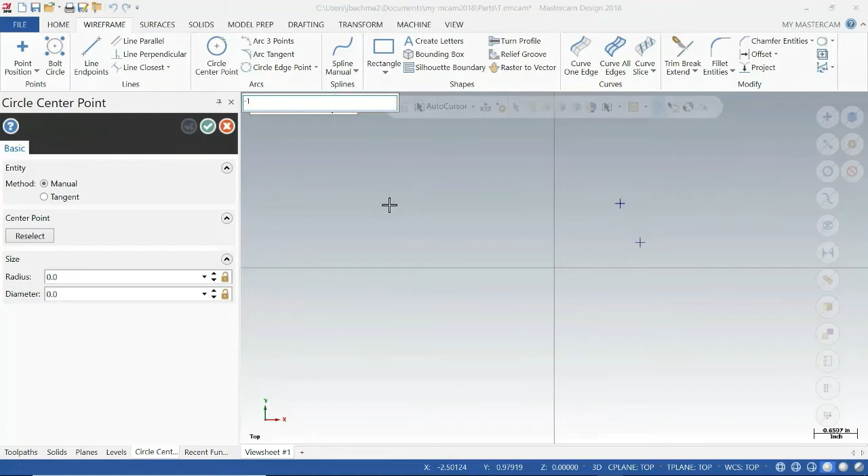Then we'll hit check to create those. Same thing with a circle - it says enter the center point, so here I could hit -1 on the keyboard, 1, which puts in the point. Then I hit enter, and I can control the diameter, or say I just want a 1-inch diameter, hit enter, and then hit check.

So now I've got my circle in space. You can see how you can use that to make some simple geometry that you can cut. You'll see that it gets this kind of crosshatched look.

If you want to change how things look, you can right click on them, or go back up to the home tab, since they have similar commands. You can change the color of some of these if you want, to highlight - some red, some blue. You can also select by colors, probably this icon that looks like colors, so now I could select everything that's red, for example.

So that's wireframe. We also have surfaces, so you can make a surface using a lot of these common methods. One I do use sometimes is fill holes, or basically fill in between two surfaces. Sometimes I'll have a hole in something, but I'm not going to drill it right away when machining - I'm going to first go over the top of the hole to machine it down, so I might fill in the hole with a surface there.

And the last one is solids. Typically I'm going to make all my solids in some sort of CAD software instead of the CAM software, but you can come in here and try to create a cylinder or a block if you want - I just don't typically do that.

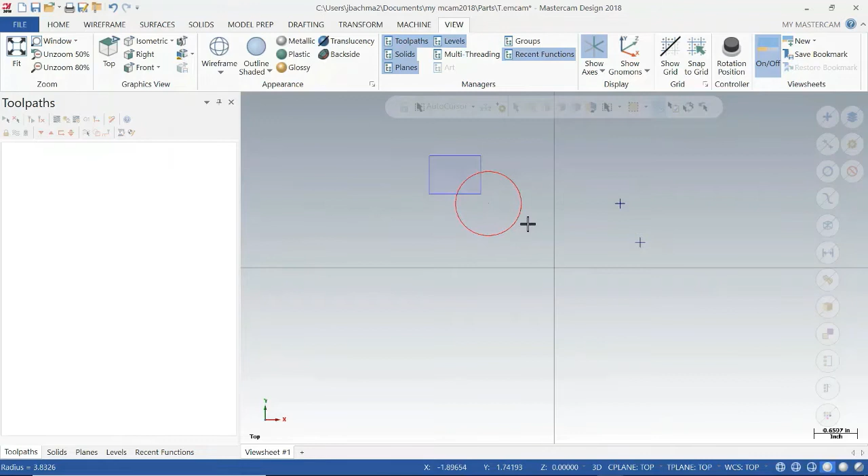So yeah, that's kind of an intro into this interface here. So there's a... first let me delete this, sorry. I'm going to select those, delete those.

Okay, so now let's start talking about the work process for working in Mastercam. First thing we're going to want to do is bring in our solid, the shape that we want to eventually turn our workpiece into to make our part. Then we're going to have to tell it what stock we're going to start with.

You should keep this in mind: you need to think about how you're going to machine or manufacture something the entire time you're designing it. This shouldn't be the first time you're thinking about how you're going to manufacture it, otherwise it's going to be impossible or not very efficient to do. You should be thinking about how you're going to hold down the stock while you're processing it. There's a lot of tricks and things you want to think about before you get up to this point, but hopefully after watching this, you'll have a better feel for what some of those things are.

Okay, so I made a couple of example solids. You can pull in SolidWorks files, or typically what I'll use are parasolids. If you have Mastercam 2020, that'll pull in SolidWorks files from 2019, 2020 easily. I actually have Mastercam 2018 still on this computer, and I have SolidWorks 2019, 2020.

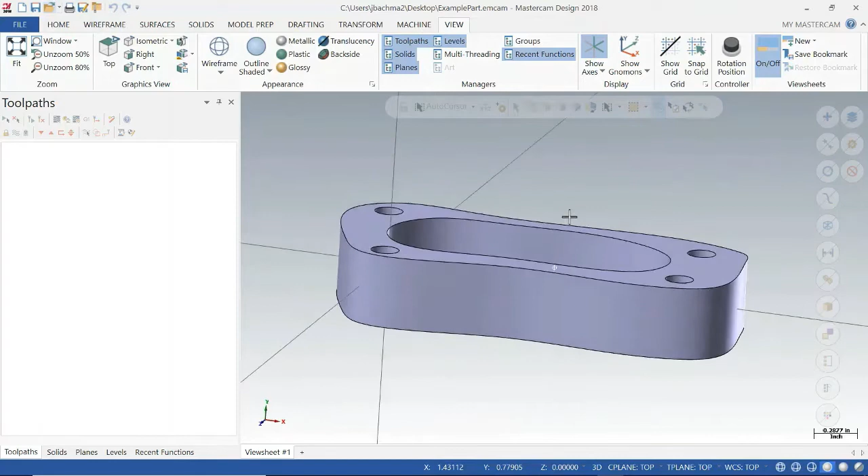You can see it's not really necessarily where I want it in space - it's going to be hard to set my zero point here. You can also see that it's not oriented the way I want. This will be the top portion in SolidWorks, so it'll actually usually pull out the front in the Z direction. So if you want your part to come out oriented right to begin with, have the side you want to come from machining facing the Z direction. So first things first, I need to move this around in space - that's where I'm going to go to this transform.

So if you have square things, a lot will be like move to origin, or for example, maybe I had a big hole here and I'm going to indicate off of that to get my origin. So what you might do in that case is select move to origin, then select that hole, and it'll move that right to the origin.

So that might be one way that you'll do it, but I'm not going to indicate on this hole. Actually, I'm going to indicate on my stock. You want to be careful a little bit when you say move to origin, because sometimes if you sit for too long, you can accidentally select some of these outer edges and not the actual center point.

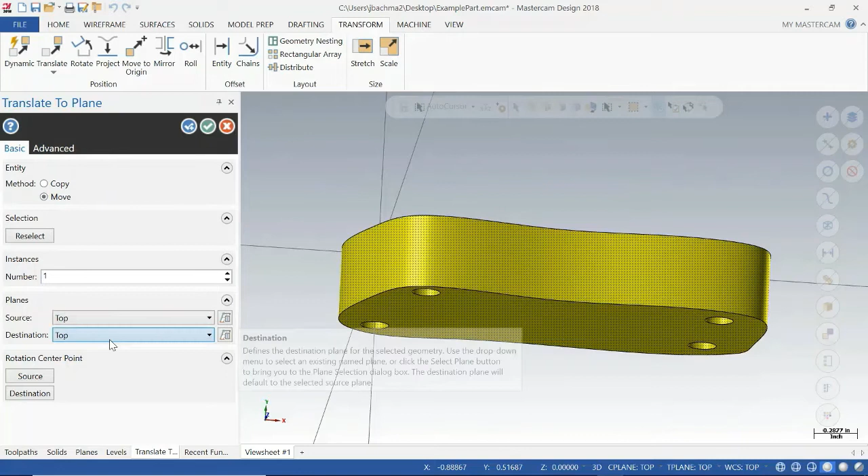Okay, so now I could rotate this down in the Z direction, but I actually just usually use the translate to plane. It says select the entities, so I want this solid, hit the end selection up top. I don't want to copy it, I want to move it. And I'm going to take this top plane and make that my front plane, so that way it's going to be facing up.

Let's give me a little preview. So that looks good, right? Still got top, top, top. That looks good.

So now basically I need to translate it in space, and there's kind of some different thoughts on this area. So if I'm going to have my stock here in positive X and positive Y, I'm probably going to touch off my origin here on the front left. That's nice because the edge finder, or if you're going to use the side of a center drill, it's kind of out front, easy to get to.

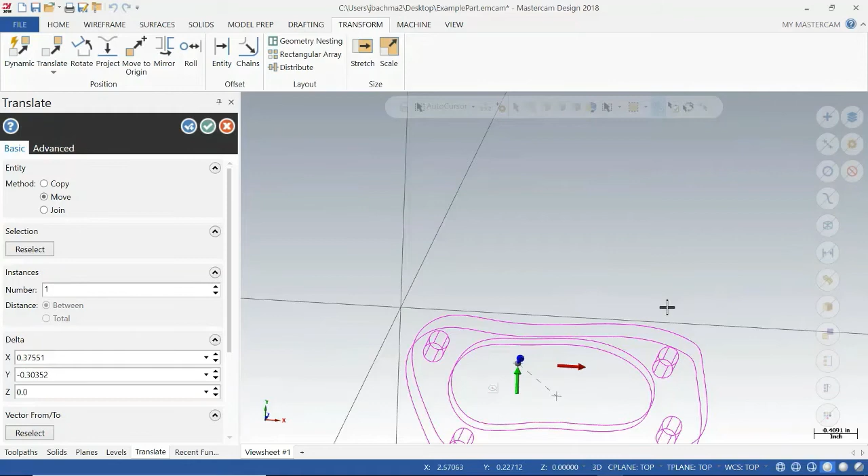You might also want to just go in negative Y and positive X. Let me move it around, maybe that'll make it what I mean a little more obvious. So if I move this, we could move our part here, and then we'd have our stock around it, and we could then touch off to the top left. The nice part about that is that you're against the fixed jaw of the vise, so that's not going to move unless you take it off the table.

A lot of people on our campus will do this front left though, and so it's probably just, if you do that, it'll be easier for people to check your work.

I can see my Z height is already correct. If it's not, you'll want to move it down so it's right even with the top. So I'm going to make it not even with the top like this. It's not really obvious, so you might not even know how far off it is.

So what I might do is go to home and do analyze. I can select a face, or I'll just select this edge, to see okay, where is this at. And it tells me this Z is at 0.05 at this point. So okay, I know it's at 0.05, so I've got to move it down.

So I'm going to come down to the transform. I'm going to click on this whole solid, and I'm going to go negative 0.05. And then I'm going to click check, right?

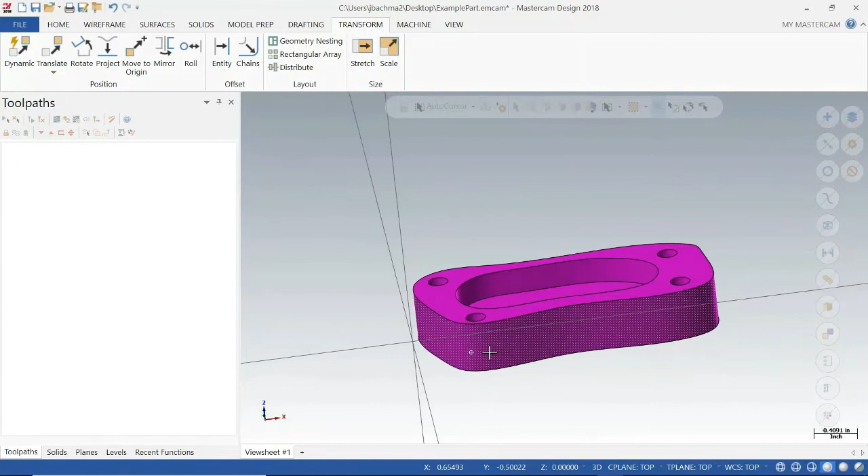So one thing you might do is I want to look at it from the front, so you might right click and then hit front. Then notice that your construction plane and tool plane got messed up. So that's actually going to mess up when you try and generate toolpaths. So you'll notice that now, because my construction plane is the front, I'm now making circles in that plane rather than the top plane. That's kind of the purpose of that plane.

But again, we're going to want to go right click everything on top, right? So the scroll wheel in and out, if I hold shift and grab the scroll wheel, I can move it around. Also left, right, up, down on the keyboard will also move it around in space for you. I usually kind of keep it somewhat isometric.

Okay, so we have our part in a reasonable spot. And I might think, am I going to put a block of material in here and then cut this out in the vise? I mean, probably that's one way I could do it.

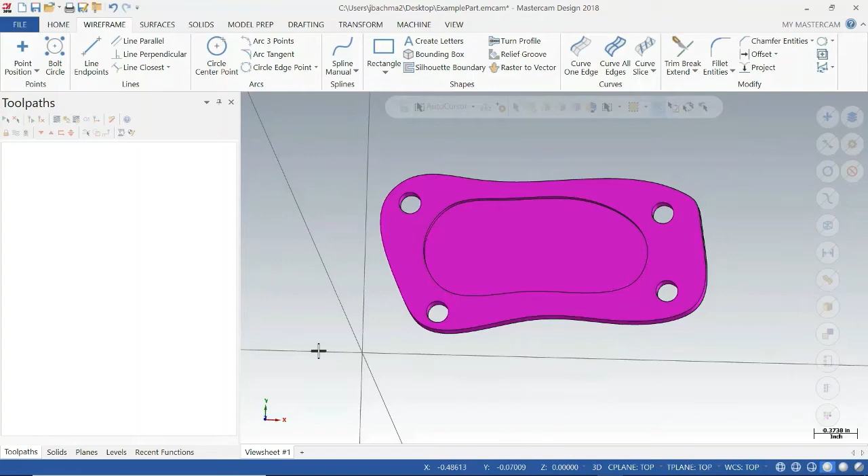I could also use some step blocks and fingers and hold down the piece right on the table with a little piece of material between it, so that I'm not cutting into the table of the mill. So those would both be possible routes to do it.

Keep in mind you wouldn't want this to get real thin over here after you machine it, and this side if it's on the vise, because then it's actually going to kind of squish your end mill as it's going around. So let's say potentially I have some kind of fingers down on the side, but that means I don't want to hit those fingers, so I have to think about giving myself some extra space on my stock so I don't hit it. That also means that piece of material, you might have to square it off in the machine. You could get a much larger piece and put this kind of anywhere and not really care about its orientation too. That's another way to do it.

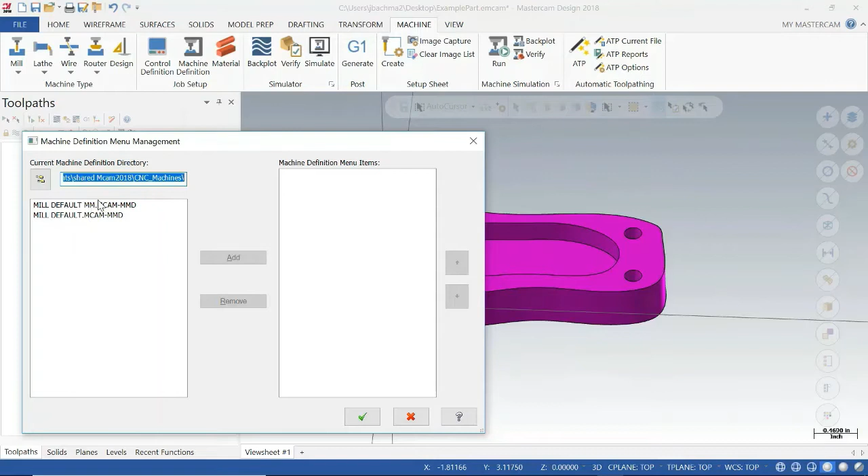Next, we're going to say what type of machine are we going to make this out of. We're going to use a mill, and we're just going to use the default. You can bring in your own type of machine, but typically I won't bring in a specific machine definition. The only thing you might use is millimeters—if you're going to do something in millimeters, you can bring that in and do everything in that system. But instead I'm just going to use the default.

Give it a second, and you'll see it'll pop up over here on the left. Let me just make sure everything's recording while I'm still doing this. Okay, we're looking good.

First thing I'm going to open up is the properties. I'm going to start with the files. Oddly enough, the options button is this exclamation point. If you see this exclamation point, that's going to bring up some more options for you in these different areas. For some reason it looks more like an error message to me—I don't know why that is, but this might even be changed in future versions. Here you can have your different libraries, different defaults. I usually don't mess with this.

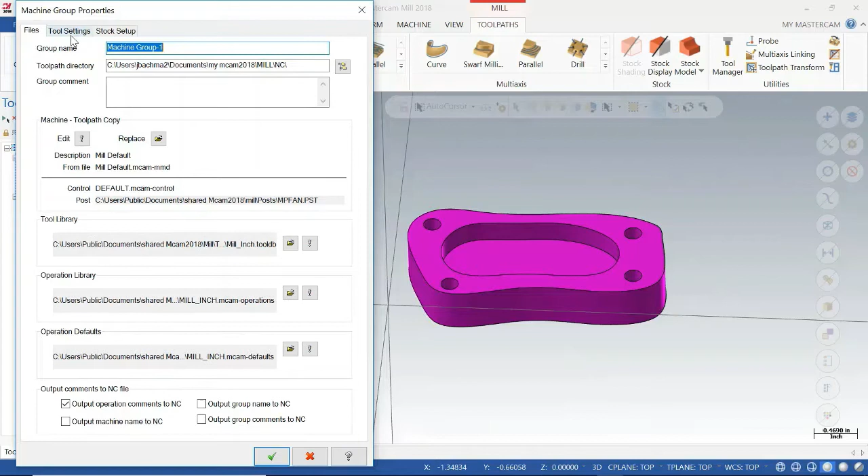Here's the first thing I'm going to start to modify: my tool settings. So first thing I'm going to do is I don't want to pull in the spindle speed and feed calculation, or pull the feed just based on the tool. It should be based on the material, and then this will also use the RPM and the feed per tooth to calculate your feed.

Another thing I'll do is assign tool numbers sequentially, and that's because if you have a big shop with 240 tools, maybe tool number 240 will always be 240. If you have some huge machine, maybe it'd be more like number 15. But for us, we typically have to load in our own tools for each thing we're going to machine, so we're going to assign our own tool numbers and put them in the machine that way.

We're going to start our G code with N100, and we're going to step up by 10. That'll help us search through it if we ever need to find stuff. Then you can select your material here—so let's pretend we're working out of aluminum. You can edit this and select different ones.

So the last step here will be the stock setup. I'm just going to start with a rectangular piece. You can bring in your own solid if you want, and you could even add some of your fixturing to it. But I'm just going to use a rectangular.

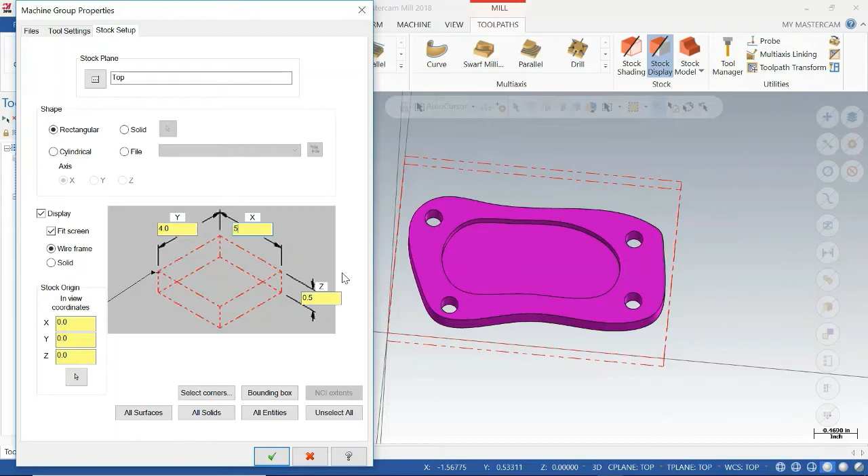So let's go back into the stock setup. I'll click there again. Maybe we want actually 4 by 5, so we'll add a few inches onto each one. I'll click check, and you'll see it's gotten a little bit bigger.

That's probably a little excessive, and we can still transform it. So maybe I'll translate this a little bit more. I'm going to select it to move it, and I'll just use my arrows.

Maybe this is the size of stock I'm going to start with. I'm going to clamp it here and here, here and here, and give myself some room to cut this piece out.

I mean, maybe you just want the pocket on the inside, and then, I don't know, if you already had this piece, but let's say you had a square piece with a pocket, then you would want to position this to an exact point. But for a shape like this, because I want to show you how to cut the outside out, we'll just put it here in space.

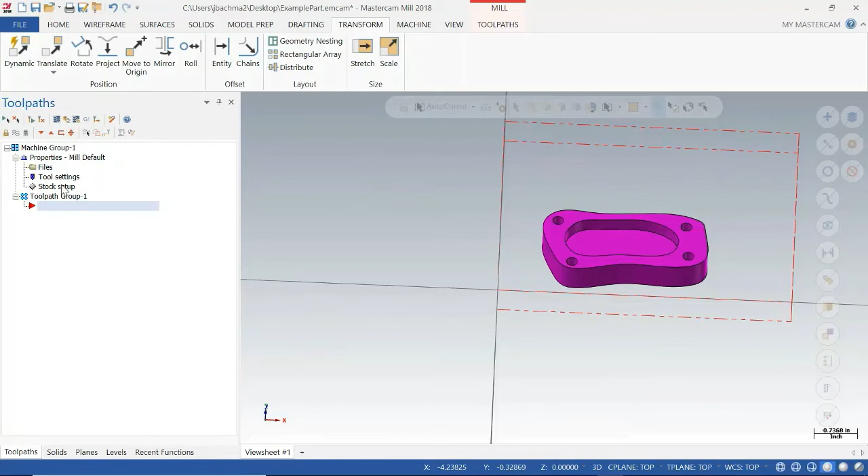So okay, we have our stock set up. I like the top of my stock and the top of my part all to be at 0 in Z, so I can tell when crossing from positive to negative in Z, I'm going to start to cut, and that's when I'm really keeping a close eye on things.

All right, so at this point you'll see that once we selected the mill, we have these additional toolpaths that have come up, and they're split into 2D, 3D, and multi-axis. I'll typically work with 2D and 3D. I'm sure more advanced machinists will use this all the time too, but I don't machine as often as I would like to, so I'm generally in these two areas.

So you can see the different types. Contour, you'll select a contour and you can go on the inside or outside. You can also add extra paths, so if you want to create something like a boss, you can do that. You can program in drilling in different spots.

But let's start with the pocket on ours, right? So we're going to start with the pocket. This is one area where it looks a little bit different in 2020 - they've just updated these symbols, but they're the same group of symbols.

Because we have a solid and don't have any wireframe entities, it won't even be an option here. So we'll click solids and we'll be able to select things in 3D. You can select just one edge here and it'll do a full loop. Here you'll have to tell it which way to go along these different edges. Here it lets you just do a partial loop. You can select faces, the last thing, and this will unselect or select things.

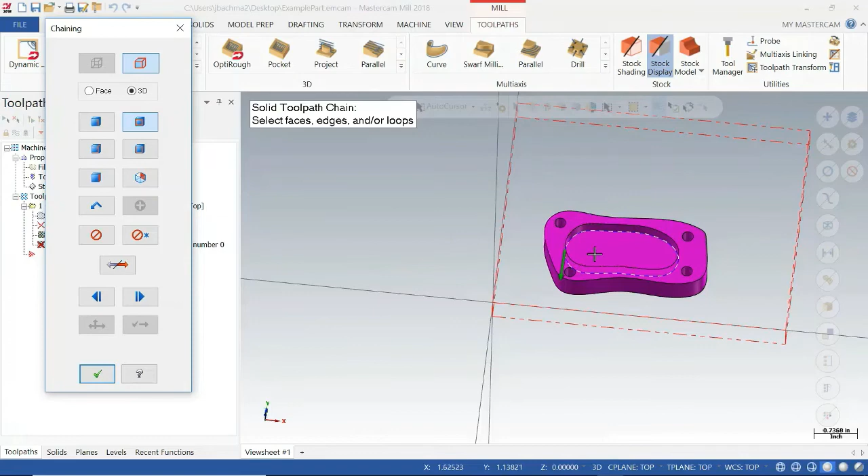The bottom is nice because then it knows what depth I want to go. So usually I'll select down in here. It'll ask me, yep, that's the right face. And I want my tool - here my tool is turning clockwise, so it's going to be conventional milling. I want to switch the directions, and I'm going to want to do climb milling, so it's going to go along the left-hand side. I'll click check, so now it knows my contour.

So if I ever come back in here and want to reselect your geometry, you can click on select chain, remove and then reselect. Next we're going to select our tool, so I'm going to come in here to select library tool. You'll see various options, so let's come in - usually what I would do is select none to start.

I'll do my flat end mill, and usually I'll use a filter to get rid of a lot of the sizes. You can see I have these options, so let's try a 1/2 inch. This is tool number 290 in their system. You'll see when I bring it in, it'll come in as tool number 1 for me, and when I call out for a tool offset or diameter offset, this will all be tool 1.

So the material brings in 400 surface feet per minute. That calculates the spindle speed, and you can use that to calculate these. Usually I'll just use rapid retract.

In this case, this is a little bit high, so I'll bump this down to on the order of 10. And my plunge rate's a little bit high too, I'll usually do this on the order of 1 to 2.

Then you have your force tool change. This is nice in that if you do 2 operations with the same tool, when you do the second operation, it'll still program in the tool change, which is nice because it's easy to jump to that spot. So this makes it easier to go in.

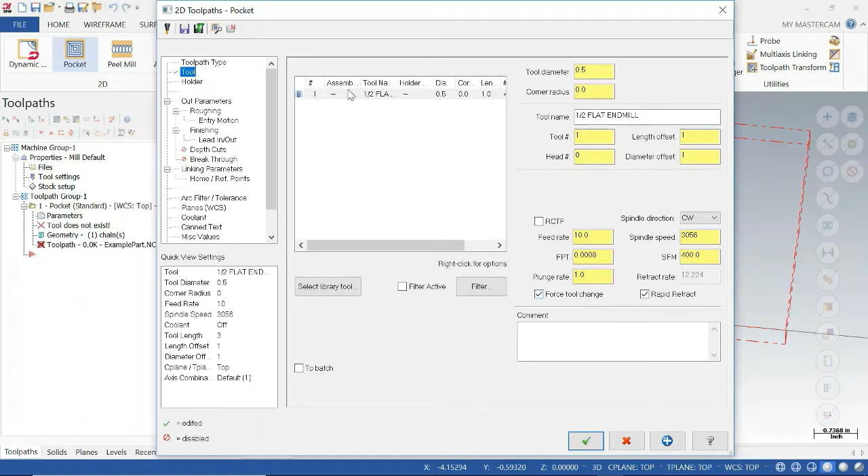So we're going to keep going. We have our cut parameters, and in this case we want to do climb. It kind of depends on how you want to do the tip compensation, so we want to compensate, and then we're going to select nothing on the wall. You'll see those lines will go away.

Next we'll go into roughing. Right now the automatic method is this high speed. I would either use that, or constant overlap spiral is also a common one to use.

Basically what you'll do is you'll step over 50%, which is a 1/4 inch each time. You have this entry motion, which is usually in percentages of your tool diameter. So here, this is just picking the option instead of having to go straight down, it'll helix down in.

So next we'll have finishing. If we want to do a finish pass on the sides of it, maybe a 10,000ths finish pass. Spring pass will basically be right at the surface finish, go over one more time. It'll kind of hope that there's a little deflection on a bigger cut, and that your last pass there won't be any deflection, so it'll cut a little bit. I'll usually keep the tool down so that it's not going up and out all the time.

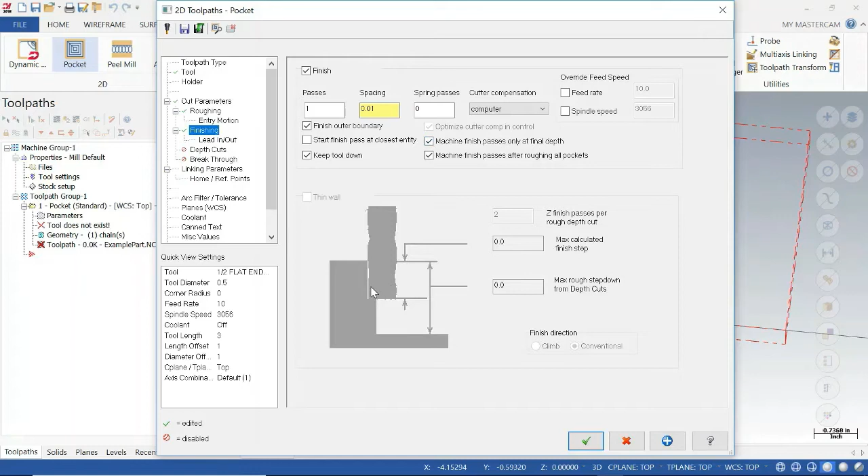If you want to try and clean out the chip more, you might pull it out. I'm only going to do it at the final depth, so I'm not going to do a finish pass halfway up and then at the bottom. I'm just going to do one finish pass out here.

So lead ins and lead out. You have this entry, which will come in tangent, and then you'll have this length. So this will come in a 1/2 inch this way, and then it'll come in at 100% of the tool and sweep 90 degrees to turn into here. If you wanted to decrease this to 45, you could come in more at an angle like this and not do the full 90.

You could also do something here, you can bring it over to here. But the typical setup's usually good here.

Next we'll do depth cuts. Maybe we don't want to do the full 1/4 inch depth all in one go, so maybe I want to do it in 100 thousandths and do one finish pass on the bottom of about 10 thou as well. Here again, I'll keep the tool down.

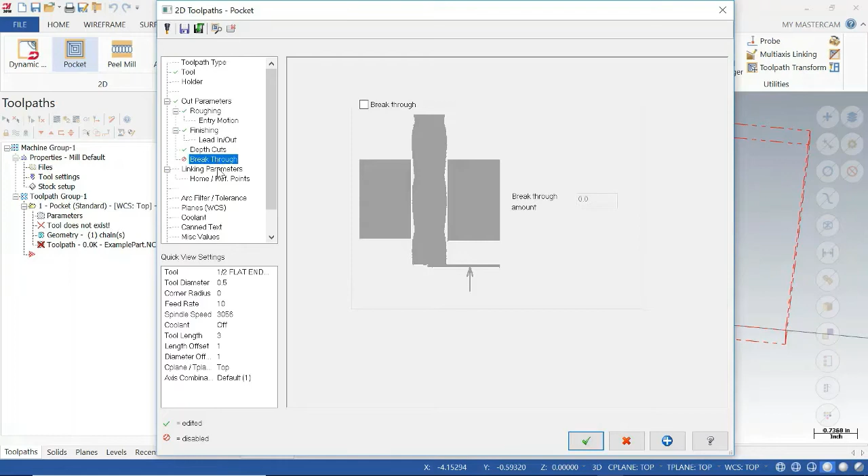So breakthrough, if I want to go all the way through, I do breakthrough. Next, and maybe one of the most important things to pay attention to, is your linking parameter. This one you're basically going to tell it where's the bottom. I can tell it incremental, which says that contour line I picked, I want it to be 0 relative to that increment. I could also do absolute, -0.25. Here, I'm going to want to do 0 for the top of my stock, absolute, because that's where I put it. This would cause a crash basically if I didn't change this. So right now I'm saying that the feed plane right here is only 0.2 from the bottom of the pocket.

So that would put it like right here. So that means it would be rapiding down all the way to here and then feeding. So I like to just make sure I have absolute for all three of these. And then this one kind of depends if I pick something at the top or the bottom of the pocket, then I might do absolute or incremental here.

The last thing you're going to select is the coolant. So we have flood coolant, and we're going to turn that on. And so here you can begin to see kind of a highlight of the things that you picked. You can see some of the feed rates, the spindle speed, coolant, and that sort of thing.

So we're going to click check. And so you can see our current toolpath right here. You can see the blue is the feed at 10 inches per minute, and the yellow are the rapids. So you can see it's going to rapid down just a little bit, do all the cutting, and then it's going to rapid back out.

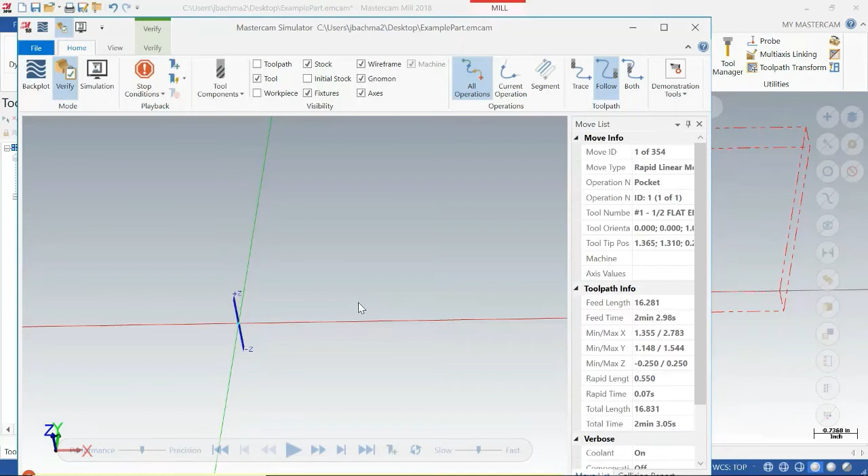All right, so you can see our stock, you can see our tool, you can see the tool position, right? So let's make this full size. So you can see I'm a quarter up. I'm at my retract plane.

And so before I run this, you can look at, we don't have a very long thing to simulate. The whole thing only takes 2 minutes in real time, so I'm going to have it go rather slow. You can modify how slow or fast it goes, and depending on your computer, you can change the performance. For my work computer right now, it's not very good.

Okay, a couple other things we're going to do is we're going to want to make some stop conditions. So we're going to want it to tell us if it's going to crash. I'm going to open up stop conditions. Whenever we change operations, I want it to stop. If I do a tool change, I want it to stop. If there's a collision, I want to stop.

You might have some tool inspection points. I don't have any, but you could select that. So the other thing that I would like to do at this point is, I got to remember where this is now. Options.

Yeah, so options at this point, you can come in here and you can say collision checking, right? So basically, now I want to select what things do I want. So if the tool collides with any of these, any of these or any of these. So any types of collisions, I want it to tell me about. Okay.

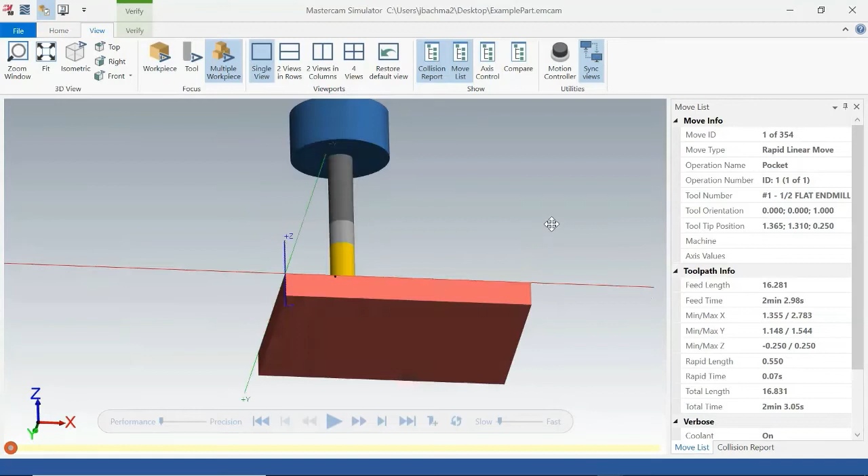I just updated my defaults. Other thing I'll do is come into the collision checking here. This is probably what I meant to select - I want it so that if it hits the shank or if it hits the shoulder, I want it to tell me about it.

Okay, so learn something new every time. If you select this option, this would be your tool just hitting your workpiece and not your stock. So you actually don't want these selected. What you actually want is this verified one, where you're saying that no matter where it hits on your stock material.

It's gonna find those collisions. The other thing I like to do is the color map. What that'll do is if you do multiple operations, you'll see how it comes in handy - you'll be able to see the different operations. So at this point now we're going to hit play.

Kind of see our stepping down. So there's our pocket, and it's smoother than that - it's just my performance is so low that it's doing it that way. You can tell my tool is not that big, so there's not much room for doing a helix down into it.

So if, for example, we wanted to switch out for maybe a 1/4 inch and see what that one looks like. We come to a 1/4 inch, and then we're going to check. I'm going to see now it's dirty, so I'm going to regenerate it. Let's go back and re-verify it. So when we come in now, hit play. It'll load fast.

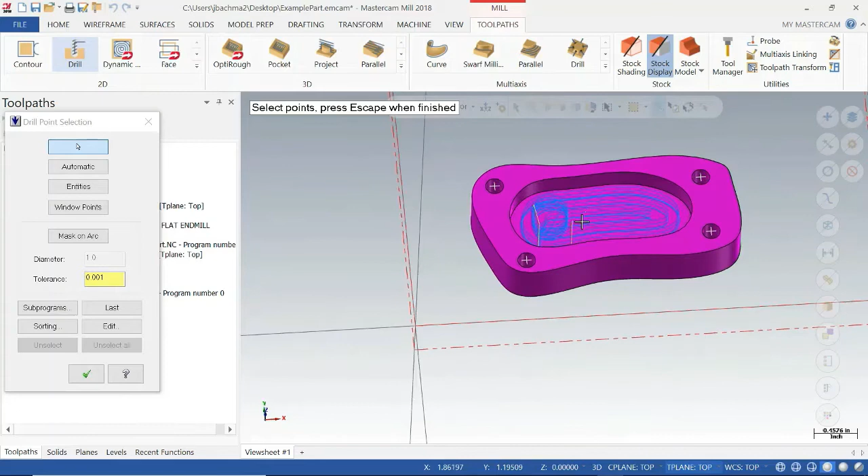As I come over here and click drill this one, then it's going to come over here and drill this one, then over here and drill this one. Make sure it's got the centers of each one. So that looks good. Click check. It's going to do it in those 3 orders as you see.

So the tool here - select tool library, my filter. Let's add a drill bit. Let's see which one of these is actually a drill bit - spot drill right here. So we got spot drill and center drill. We're gonna set tool diameter less than maybe 0.3.

Because I'm gonna want - let's open this up. I'm gonna want, usually this number 3 center drill is the one that I'm usually going to use. So I'm going to click check right here. It's going to bring in my surface feet per minute for that, and calculate my spindle speed, my feed rate.

Which is going to be a little bit high here. I'm going to want, maybe we'll just do like 2 inches per minute, because we're feeding down into the piece. We can go back into linking parameters.

At this point I'm going to do absolute, and usually, so I got a 1/4 inch tip, so maybe I'm going to go about 0.2 inches, and these will all be 0.1 from the top of our model. So this, and that should be negative, right? Negative 0.2. So 1/4 inch wide, I'll have a 1/4 inch tip, so I'll go about 0.2 to give me that nice cone kind of countersink for my drill bit to go into.

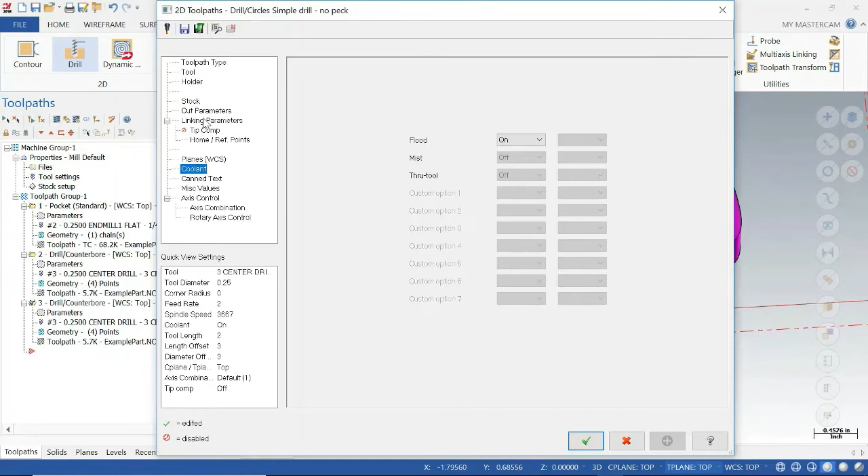So if I want, I can right click on this and do copy, and then come in here and paste it in again. I'm just going to do almost the same thing, but this time maybe I want - I think I have roughly a 3/16 hole in here. So I'm going to do select tool library, filter. I'm going to want my spot drills.

Hopefully I have small enough spot drills in here to do this. Oh, it's only got kind of big spot drills. So let's...

So if we want to, we'll come in, we'll put in an eighth, and then or a quarter, and then we're gonna modify it. So we'll hit this spot here. So we're gonna say, actually, so you can see, let's come in here and select the 3. No, let's not. Let's do 3/16. We'll do, yes.

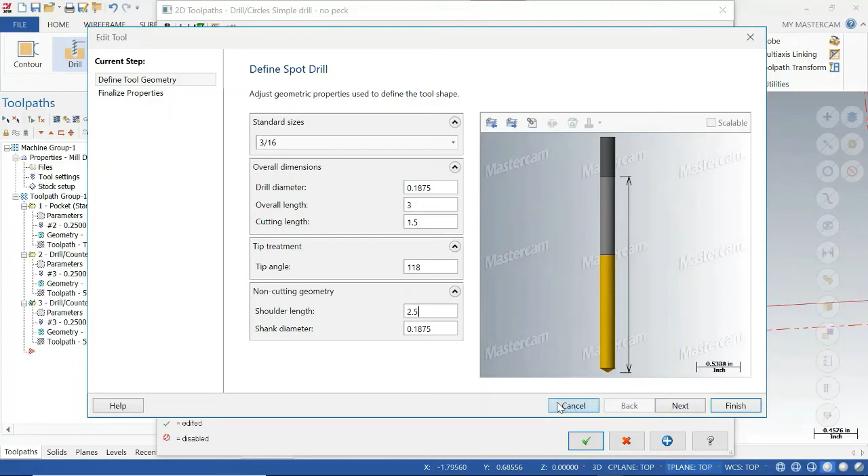And then we're gonna have to change the drill diameters here. The overall length maybe is 3 inches. Cutting length is 1.5. So we'll bring in, this is typically going to be around 118 degrees, if I recall right. So when you click on these, you can see the different things it's telling you about here, and then we're going to click finish.

So we're going to change the name of this tool. This will be the 3/16 spot drill. Brought in the same parameters from before, which is close enough for what I want to use. I'm going to click check, then we're going to have to regenerate to fix this one.

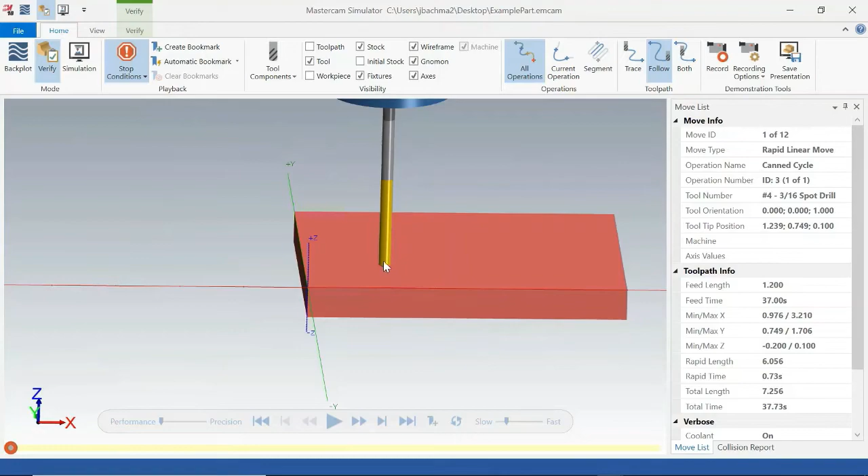Okay, so what we're going to do next is verify the selected operations. What you can see now is it's just going to do the drilling — if I close this, you can see which ones are selected. So before I verify, I might want to select all operations, and then hit verify.

One thing you can do if you want to move these around: for example, if I drag this up and put it here, it's going to bring this above it. If I bring this back to here, it's going to put it here — that's what I want. So if I want this to be under number 1, I'll drag it to 1, and it's going to go under it. So now everything's selected. Let's verify.

So I have my quarter-inch end mill, and let's hit play. Right, so now there's an operation change and a tool change, and it's going to come in and we're going to see what we do with the center drill — you'll see this one is blue, and this one's purple, so we'll see the difference. So it basically did those 3 holes, and then it's come through and it's going to drill for those ones right there.

So one thing we want to do is change our linking parameters, because we'll probably want to drill all the way through — at least not too far. So that's one thing I can tell we can change here. Let's close this so we have our parameters.

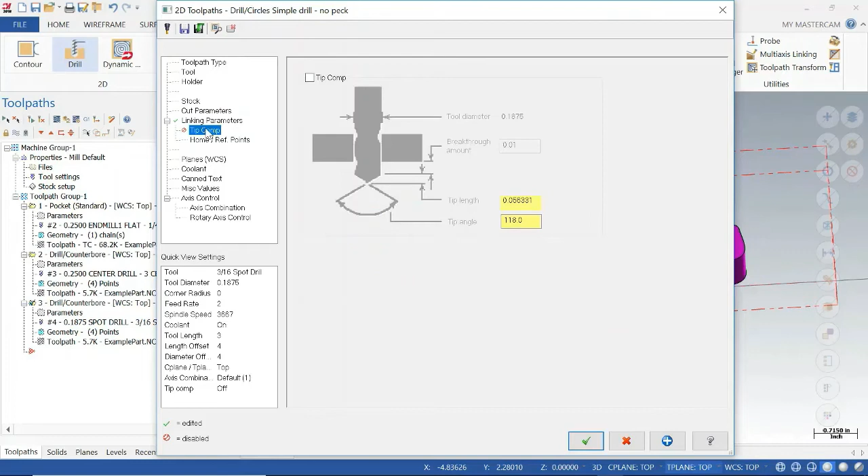So I noticed that I didn't change this all the way down. I'm going to go absolute — this whole thing is half an inch, so I'll do -0.5. You could compensate for the tip, right? So here's this 118 degrees, and the breakthrough amount, so about 10 thousandths. That looks good to me.

So I'm going to regenerate that dirty operation. I'm going to select all, and then hit verify again. And I'm going to bring up the performance just a little bit, just because before it was getting a little crazy.

All right, so we got a tool change, it comes in, does those three spots, and then we come in with the 3/16 all the way through. So that looks reasonable — no collisions. I can look down in the bottom right, and from this angle see how far down below the part I'm going.

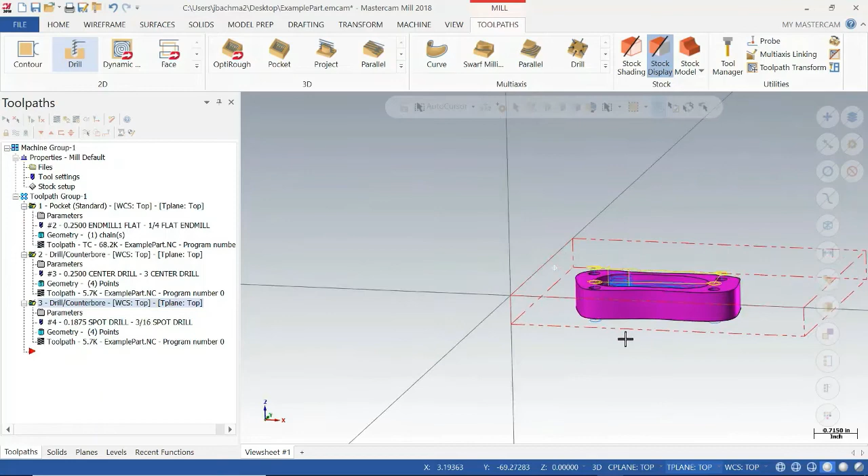So that's that 0.1. So let's look at a couple examples if we did something wrong. So one example for doing something wrong might be — let's say this hole was actually much deeper than the end mill could cut. So instead of having this 0.5 inch cutting length, let's say it was surprisingly short, 0.1. Keep in mind, typically you won't have something that's 0.1, but you might want this to be 2 or 3 inches deep, which will cause issues because you don't have a cutting length that deep.

So we come in here and now do verify. Because I added the shoulder — the section of the mill tool between the shank and the cutting length — it's checking for collisions basically. Now when I do this, you'll see that it's going to give me a collision warning. So it'll do first.

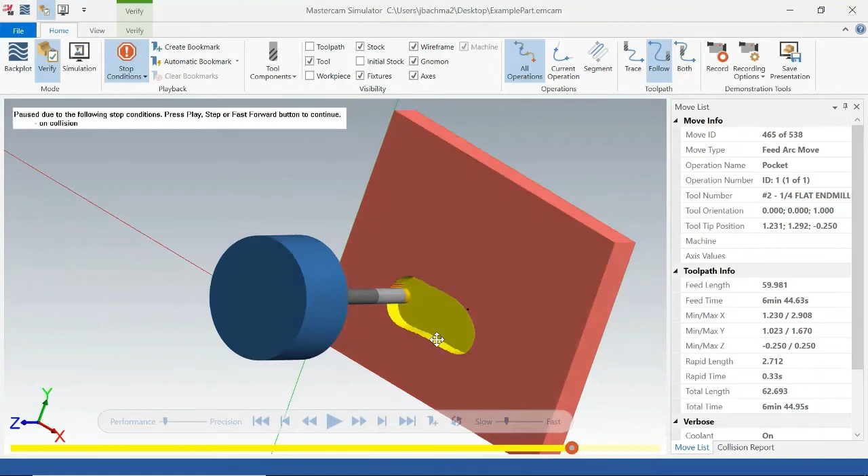So it took a little bit, but you can see that it begins to notice all of these collisions inside here. And so that's the one nice part about having collision detection on.

So let's go back here and put this back to typically a quarter inch. We'll probably have about a 1 inch cutting length, so that's more reasonable. Let's generate that.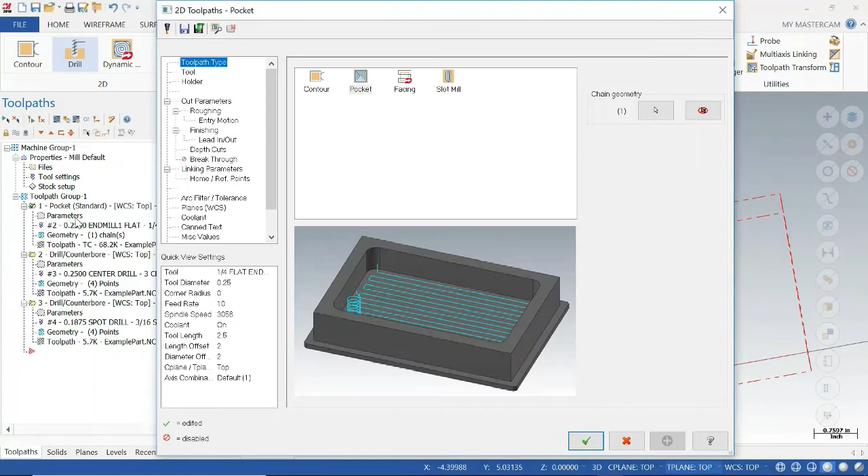Let's say we also did something wrong. Let's say we're on our linking parameters here, and I forgot to— or maybe let's do one that's even easier to accidentally do. Just based on our geometry, it might not be as much of an issue, so let's go to this one actually. So say on our linking parameters, let's say we could do 2 things wrong.

We could put our top of stock as -0.2 essentially, and then that means it's basically going to at high speed run into our part here. So let's regenerate that operation.

So let's try running it now, see what it does. So it looks like there it did not detect quite right that we had—so it was unable to tell that we had a rapid going down into our part here.

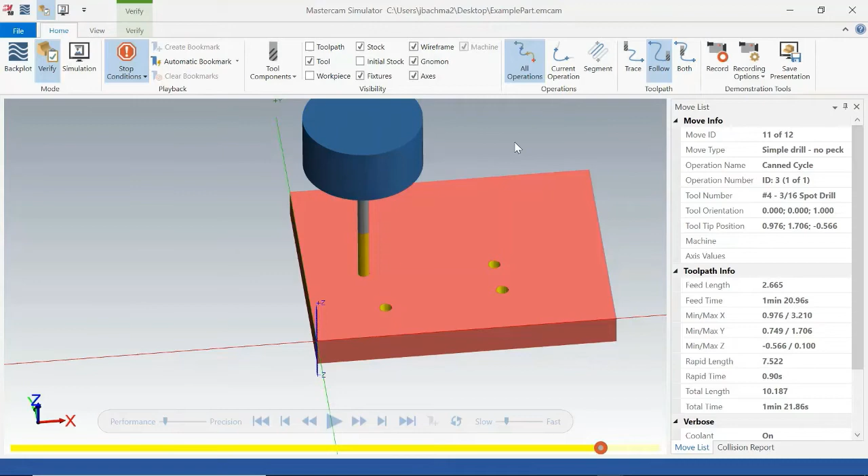So that's one thing you're going to have to really be careful of, right? Is setting these portions right, because it didn't realize that even though it was doing this yellow rapid in here, that it was gonna crash. So let's see if we can do this more.

Let's just try to make this more pronounced. So it looks like it'll bring in the yellow where this edge of the bit's going to be before it's kind of rapiding over.

I wonder too if it's just also getting smart enough that it's realizing that what I did here is wrong. But so we're going to put in 0 here. So let's look for another error.

So let's say we didn't actually retract up enough. Let's say this was negative 0.4, and let's say this was negative 0.1. So let's regenerate.

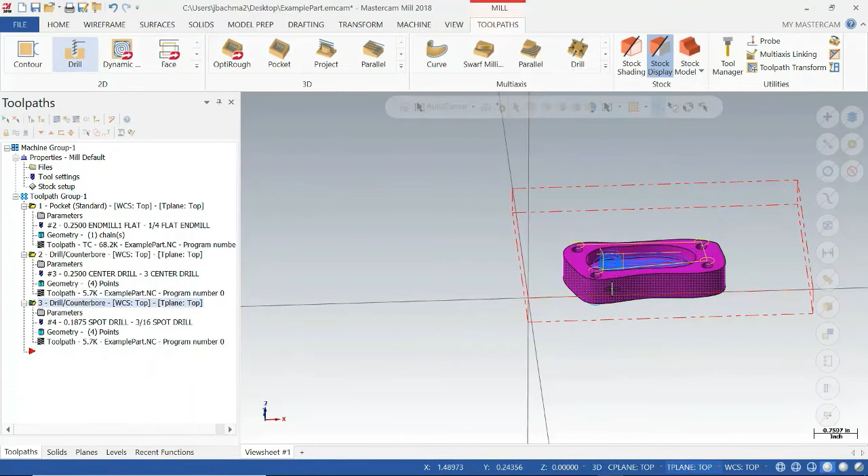So there—now it realized that the side of the tool, instead of the tip, was running through the material, and so we had a collision, right? So it picked up that mistake. That's another one you want to be careful of.

One thing you might want to do is a lot of time you're going to want a peck drill, especially if you're going to put any sort of length in. So in this case, when I peck, typically you'll probably want to peck roughly the diameter of the drill bit, so maybe I'll do 0.1, something like that.

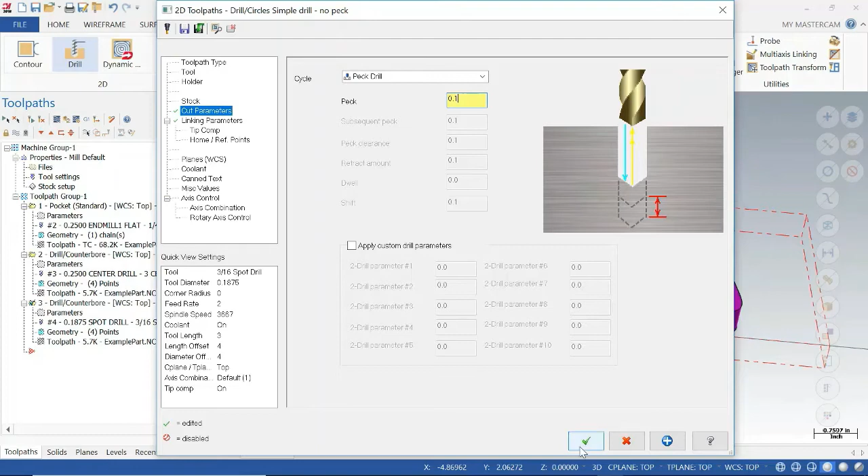And so now it'll go down and then up again, down and then up again. So the pecking is kind of the typical process to do for any drilling of depth that's more than maybe half the diameter of the drill bit, something like that.

So here's our part so far. We have all of our holes, and so now what we might want to do is come and cut this thing out. So what we're going to do is, for some reason, when you want to do tabs, the tabs are not going to recognize this outer contour. So what we're going to have to do is flip our part over.

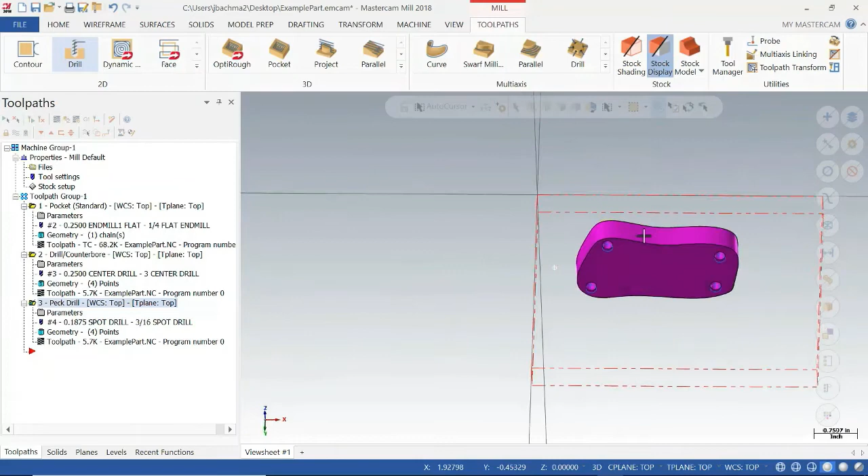What I'm going to do is say I want to wireframe, and I want to turn this outside edge into a kind of wireframe entity. So I'm going to select curve, all edges. I'm going to select this face, right? And then I'm going to click check, end selection, and check. So now I have a line here. I also have lines on my circles too.

So what I can do now is when I come to my toolpath, this time I just want to come in and mill around the outside. I'm going to do my contour. This I want to do the wireframe here. So I want to select this edge.

Maybe I want to come in from this side, my contour, and I'm going like this. So this is climb milling, which is good. Here I'll have options—I don't know why this exclamation point is options again, as I said before.

So in this case, maybe we'll use our half inch end mill because we need to go a little bit deep. I'm going to force the tool change and do a rapid retract. I'm going to get my feed rate down to something close to 10 for this, and 1 on the plunge, something around a thou per feed per tooth should be fine. We're not in a big rush, just making one of these.

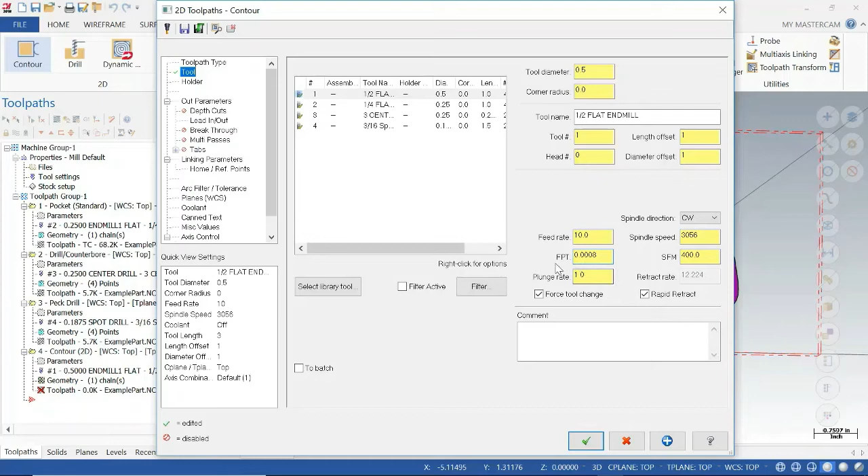So then we're going to go to the cut parameters, make sure there's nothing on the walls, and then what we're going to do is might get rid of any lead in or lead out because we just want to cut it away.

We're going to come to the linking parameters. We're going to say we want to go all the way down to the bottom. Zero is the top, and I can leave these two as absolute. Otherwise we'd have some crashes.

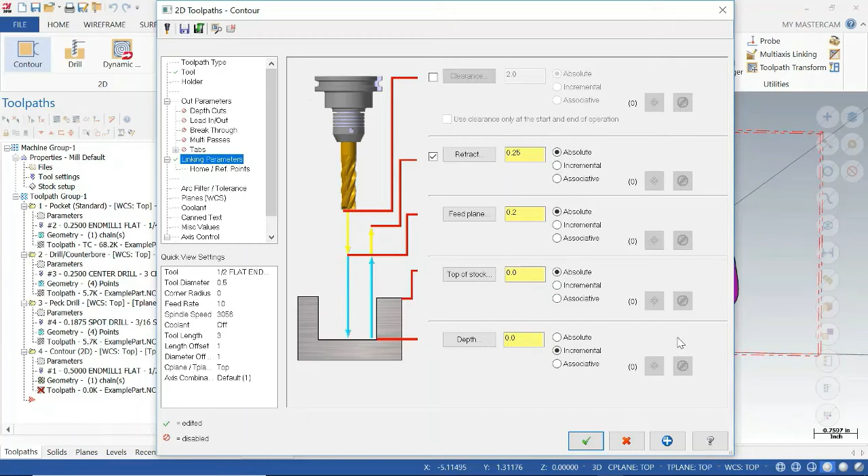Next, we'd like to leave some tabs though, because as we cut this out, we can't let it fall, or it's going to break our tool. So what we're going to do instead is add a few tabs.

I usually like to pick the tabs myself. So this is a side view of the tab. It's going to come in and do an angle, but I don't need an angle, so I'll just have it go straight vertical. I just need a partial tab, that's fine with me. So I'm going to go manual and select the midpoint.

I'm going to come in here and do position. I'll maybe do one tab per side. So I'll click — this tab is way too big. Let's go back out. So 1 inch is way too big. Let's do 0.5 — not negative 0.5, just 0.5.

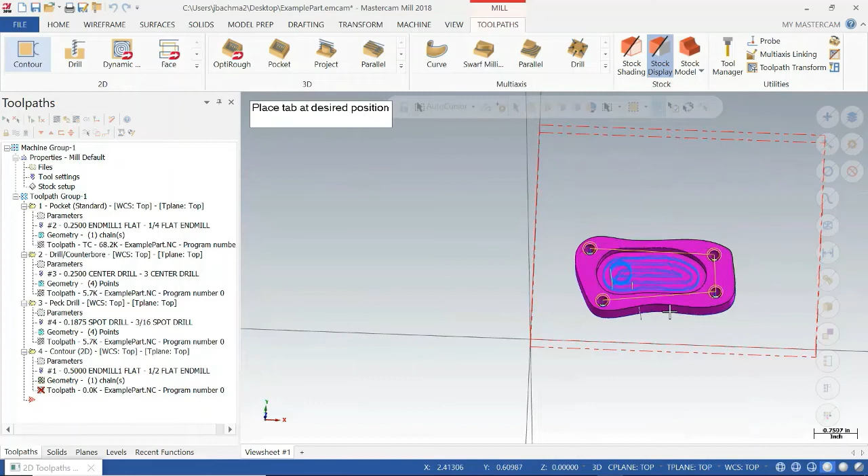And then we'll do the position. So now I'll select it. Even that's probably on the big side, but maybe we'll just do 2 tabs. I'll do one tab there, and then I'll select this chain again and do one tab on this side. I'll press enter when I'm done.

Find my 2 tabs. And this one I'll maybe also do a breakthrough — maybe 0.020 breakthrough just to make sure I actually get the whole thing. So I click check, it looks good.

So it looks like it only did it in 1 pass right now, so that's maybe the only downside. I'm going to click again — I should have gone to my depth cuts. I don't need a finish cut, but let's go down 0.1 per time.

So we have to regenerate the dirty pass, and now you'll see I'll have multiple passes, and I'll just do the one kink at the bottom.

So one thing — now that I have my 4 tools, you'll see I'm going to want to put in my tools usually in the order that I'm going to use them. It's easier for me to remember it that way.

So what I'll do at this point is right click on here and do edit selected operations, and renumber the tools. I'm going to start with 1 and increment by 1.

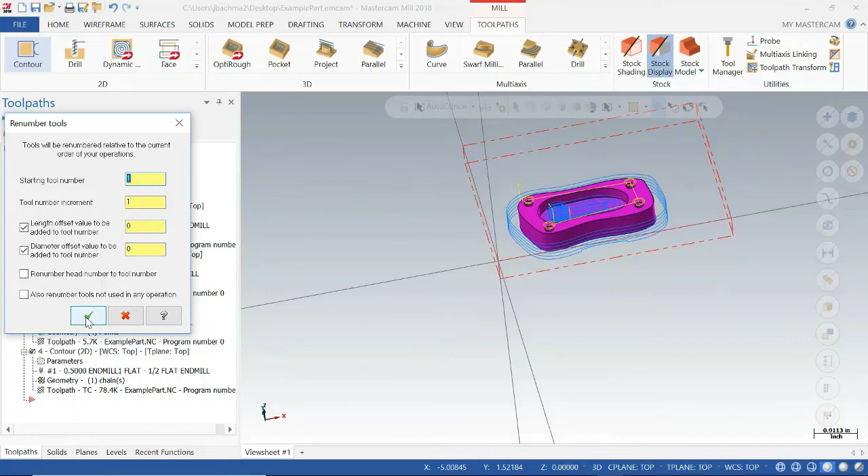And I don't want to add any numbers to these offsets. Oh, that was weird — that's because I didn't select them all. So that'll also happen when you're trying to delete things. Reminded of accidentally deleting things, let's save it at this point.

So I have them all selected, right click, edit selected operations, renumber tools. All right, 1, 2, 3, 4. Looks great to me. Let's verify the selected operations.

So we'll see the different colors. You can see kind of the respective length of time. Total time it'll take to machine this is 20 minutes. So it's going to come in there, and it's going to hog out this section.

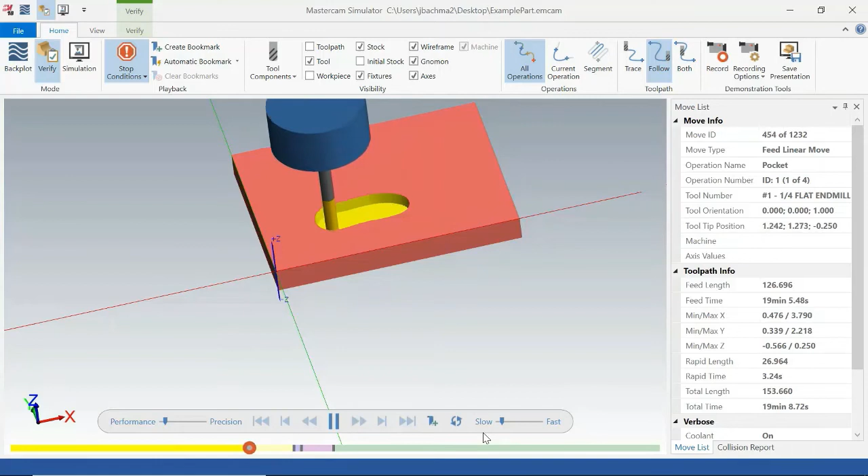It's switching its tool. Looks like it's above—that looks good. Come in, it's going to poke those 4. Another tool change, come through, peck all of those.

Now we're going to come through and use our half-inch end mill. So our half-inch end mill will come around the outside and figure these out. You can see the different colors from each one of the tools we're using to cut.

You can see the 2 tabs that we left so that this piece does not fall in. You just got to check now—if you have some fixturing holding this here and here, you want to make sure that you're not running into it at this point.

You might try and have this in the vise. It's not much material over here, so I'd want to move this and have a nice chunk of material on each side inside the vise, so we're not just pressing on these little tabs—because right now, if we were pressing on it hard, we could just pop this part out.

So far that looks pretty good for making this part, and we've gone over some of the standard pockets, drilling, and the contour. Some other stuff you might use is facing things off. The other thing you might use with contour, I suppose, is multi-passes.

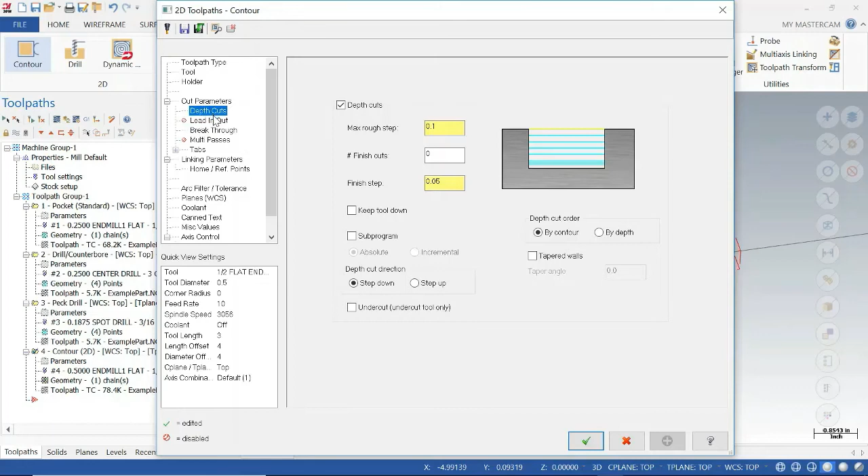Sometimes I'll use this—let's say I actually want to make more of a boss, or I wanted to make it bigger. I could do maybe 3 of these passes, and maybe do them at 50% of the tool diameter.

And then if I regenerate this, you'll see it'll kind of step out. Of course here I'd start to hit my vise and stuff, right? So that would not be desirable. But there are cases where maybe I want to make a boss or something, and I'll do this.

Let's do the backplot on this operation. So one thing we'll test is doing the backplot. This one will control the speed of it. You can quickly go down and click the info and get the time.

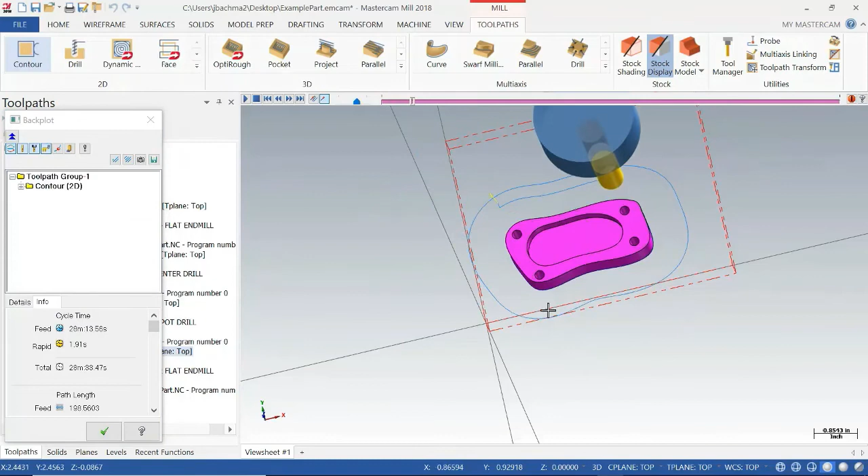So this is now 28 minutes. We can quickly see where the rapids are. It's kind of starting at the outside, going to the inside, it looks like—cutting this.

All right, so I can close the backplot. That's just a quick way to check on things, how things are going. So we'll remember to save it at this point.

So now that I've talked a little bit about some of these 2D operations, I'm going to do a brief thing on some of the 3D parts. What I'll do is file open, and I'm going to use my example 2 part. So let's open that part here.

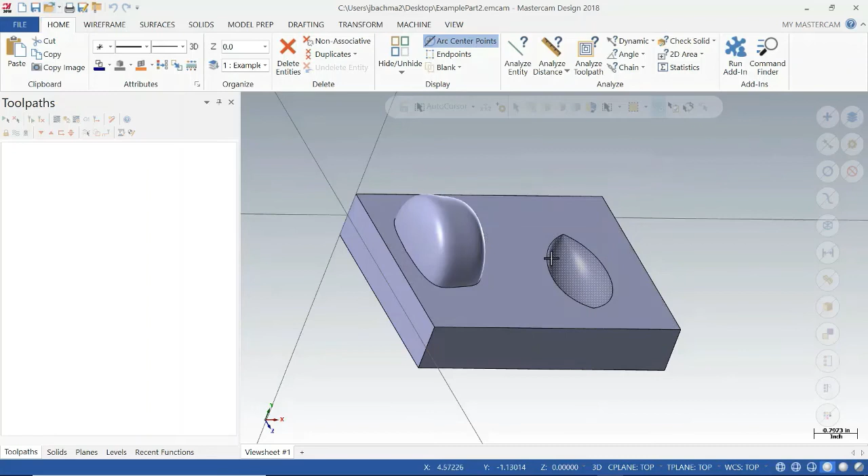So what I've basically made here is, let's say I have a part with some sort of roughly random protuberance and some kind of random pocket that I want to be able to machine out. Same things apply, right? I'm going to have to turn this so that it's up in the z-axis.

So I'm going to go back to my transform, translate to plane. I'm going to select this solid, right? And then I'm going to come down to the front, right? And so when I click and I want to move it and not copy it, now I can have this point here.

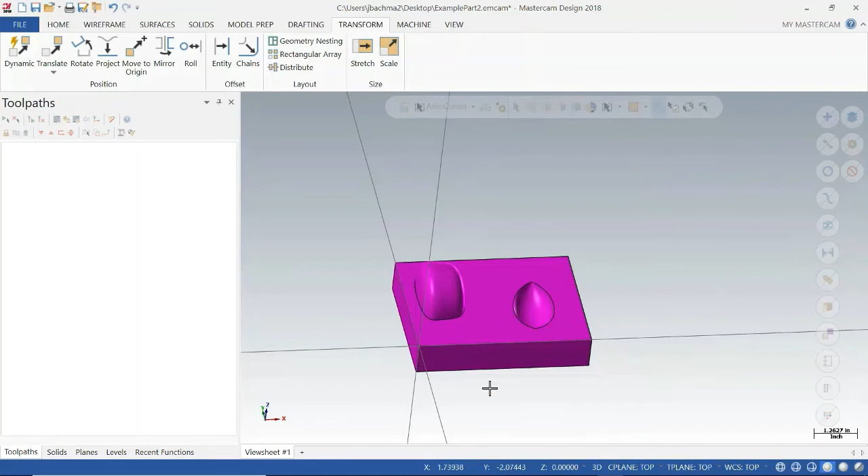So what I might do next—one way to quickly move this all the way down over here is I could click this point, move that to the origin, and then the last thing I'll do is translate this entity down. So we'll end the selection, and then I'm just going to move this down.

Check, so that the whole thing is below the z-axis—let's check here. I don't even know if this analyze entity will really work. Yeah, it's just too complicated of a shape.

We can right-click and do front view, and we can see that we're under our stock. But remember, we'll go right-click and go back to top, so that we keep our planes in the right place. All right, so we're going to go back to machine again.

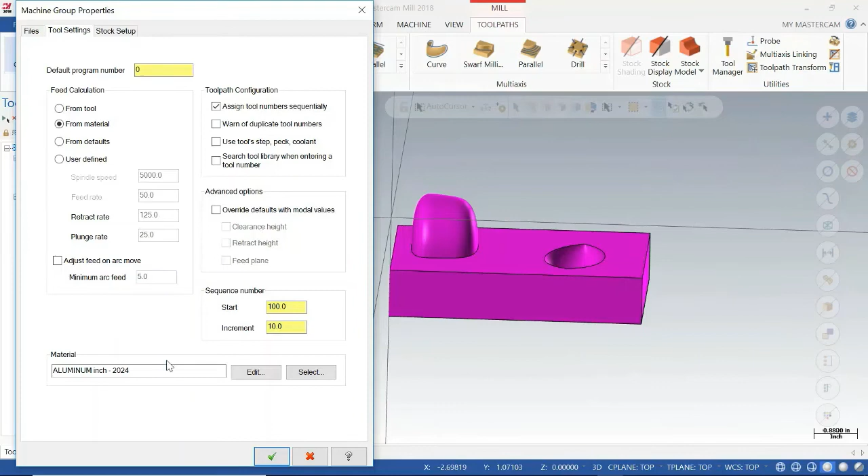I'm going to go back to the mill and default. So that's just going to bring in the default machine. Same thing we did before, right? We're going to go into our tool settings, calculate the feed from the material, assign tool numbers sequentially, put in our material, start with 100, increments of 10. So we've seen that all before.

Next thing we're going to do is set up the top stock. We're going to bring in all the solids that we have at this point. I'm typically going to take this point.

Let's say this is 0, 0, 0. This might have to be a little bit deeper, so 2.1. No, these should be the right sizes. So now we have our stock set up. You can see that we'll start with a little bit bigger stock, then we'll machine this out.

Let's say we're just going to be holding this on the side in the vise. That's the way this is going to be held in. So we could actually do this without having extra overhang material to clamp it down. Again, I'm going to save frequently. So this is my example part 2.

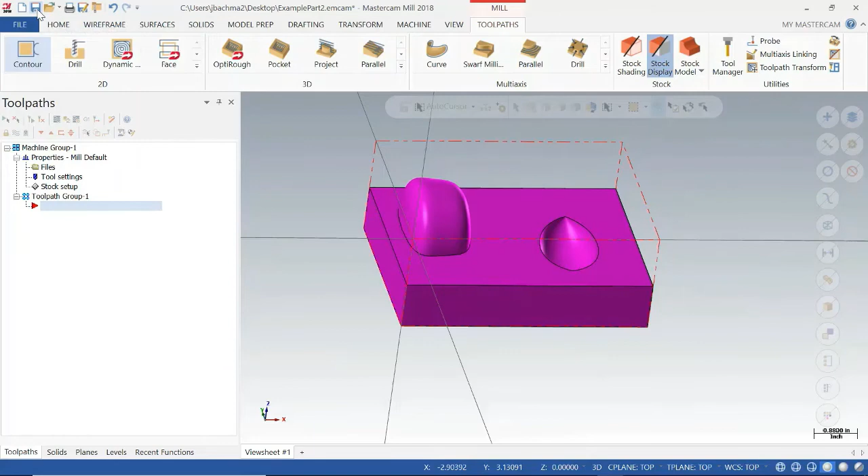When doing some 3D machining, instead of the 2D toolpaths that we were using before, we can start to look at some of the 3D toolpaths.

When you open up the 3D toolpaths, you'll see there are 2 groups: the roughing group and the finishing group. The difference is the roughing will actually look at where the top of your stock is, and it will calculate each step down in Z to remove that material. The finishing will just come down near the surface that you select, and then it will do 1 or 2 passes depending on what you program.

Now that we're doing 3D type cuts, we can start to look at some of the different styles that they have. What you'll notice is most of them will keep one axis constant, or at least one direction constant, and then move in the other directions.

For example, you can see the pocket and the OptiRough generally work down as constant Z, so they'll step down. The project toolpath lets you take a portion of your geometry and project and cut along that plane. Here you've projected a plane onto this cylinder.

Parallel lets you pick a direction to go in. Here it's going only in Y, and it's stepping down in Z. You can see the plunge, where they keep X and Y constant and just move in Z, for example. I typically like to use the OptiRough. It usually seems to work pretty well just to get rid of a lot of material.

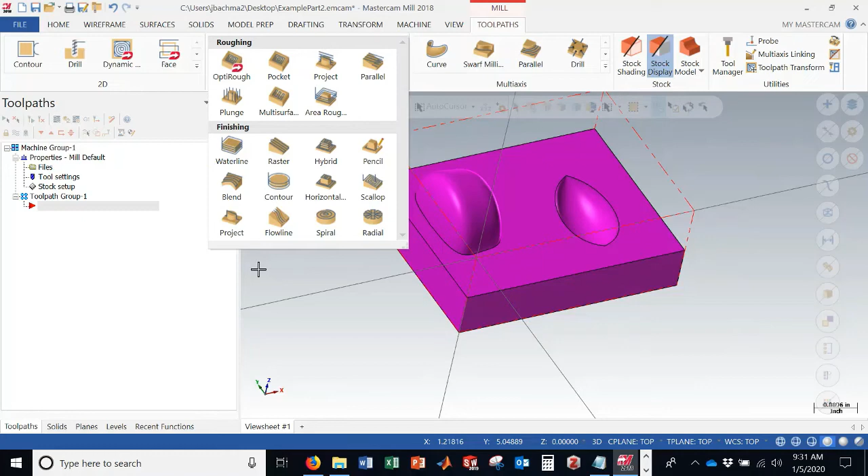All right, so we're going to get started trying out the OptiRough, the optimal rough. For now, we want to tell it what we want to machine, so we're going to go to machining geometry and tell it what we want to machine, and if we want to leave any stock on the wall or the floor. When I come in here, I might select this surface and do end selection, double click, and we'll want to leave 10,000ths on the walls.

And that way we have something to come up and finish on. So if you're going to do some 3D work, you're pretty much always going to want to use a ball end mill. We can go to the filter, none, looks like I already have the ball, less than 0.6, and that's so you can get tangent to the surface. We're going to click check here, and let's just try the half-inch ball end mill.

Sounds reasonable. We're going to force tool change, plunge rate about 1, feed rate of about 10 — not 1, 10. About 0.001 feed per tooth. Maybe if you want you could go faster than that, but using our machines, we'll leave it like that.

There's a lot more cut parameters in here than even I'm familiar with, but if you really want to optimize things, I would step through each and every one of these, making sure it was something reasonable, checking the sides. But for a lot of this 3D stuff, it's going to do a lot of this automatically, and then we'd add on the coolant, right?

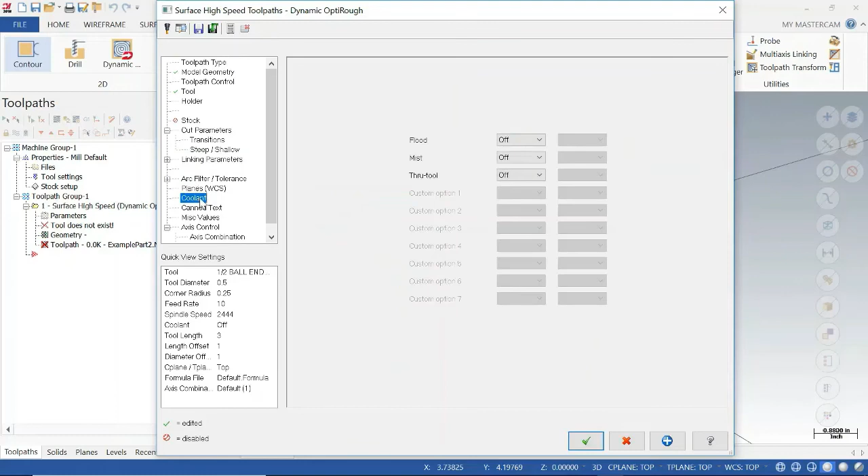So let's do a check. When it has this little green thing, it means it's calculating. So you can see now the complexity of the tool movement. One other thing you'll notice is it didn't actually cut anything except around it. So I'm going to save it at this point, because when I verify it, there's going to be a lot of movement here, a lot of processing, so it could easily crash.

So I'm going to be patient with it — I don't want it to crash. I'm going to make sure I still have all my stock conditions, make sure I still have my collision checking, got my color map, that looks good. So let's try this. We probably want to go a little faster in this case though, because this is already 48 minutes just to try and do this.

And I think that's really going to define how fine these heights are here. So you can see here we have a collision, right? Our tool is not long enough. So that's one thing we're going to need to change.

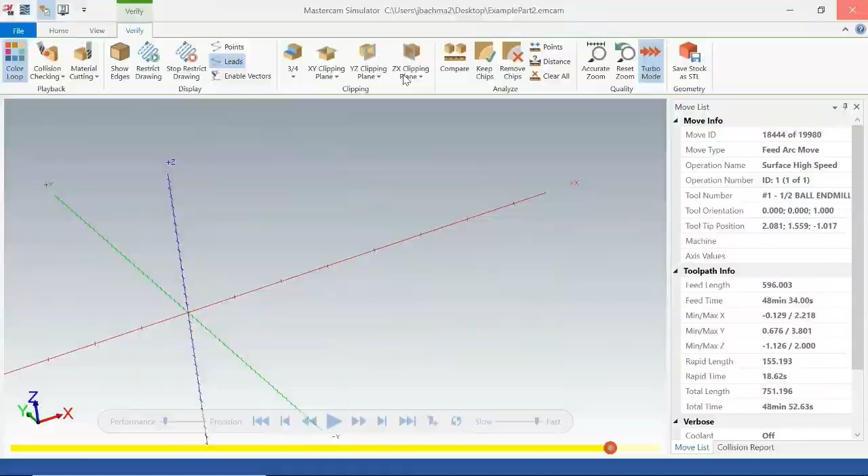So we'll need to come in here and make sure we get a 1-inch ball end mill with maybe a 2-inch cutting length, and then we'll regenerate the path. Right now it's computing... no, it's done, it's got the toolpath. So let's do the verify.

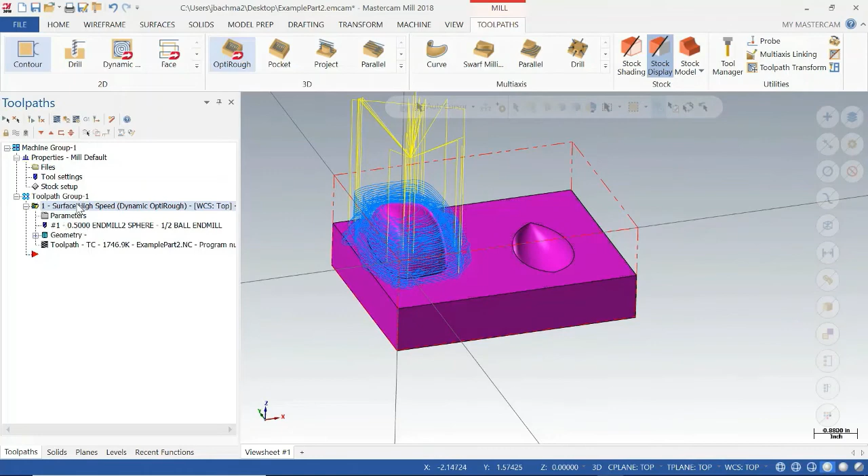So you can see it comes down here, but this is kind of not what we wanted. So what we actually want to do is get this whole entire surface. So I'm going to delete this, and I want to select not what's inside of here, but make this whole thing flat.

So what you can do is go to surfaces and fill the holes. You can either select a surface or a solid face — I'll click this one. I don't want this boundary though, I want this boundary over here to be added. I select, all right, I'm going to fill that in. I click check, and that basically means it's going to fill in that face.

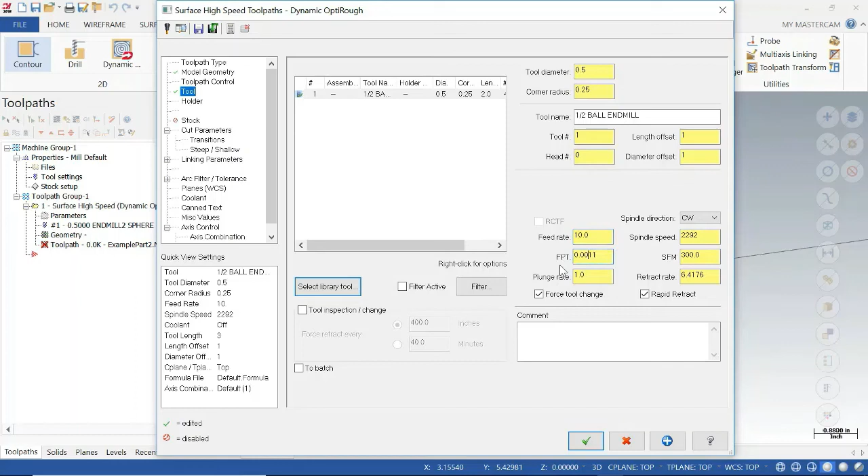So now, if I want to choose this roughing, I'm going to select things — I might select this, this, and that. I'll do pen selection. I'm going to still use the same tool, maybe about 10. We're going to up this — we're in aluminum, so 300, plunge rate of about 1, 10. We'll keep all of this the same, so we'll regenerate it.

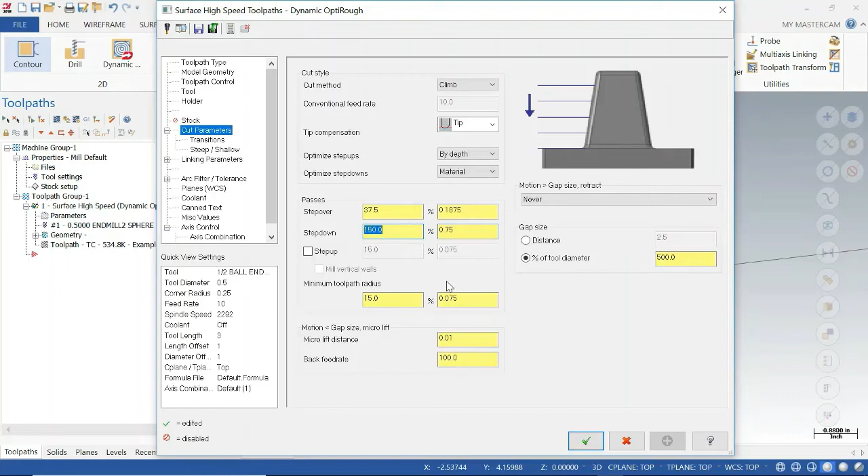So you'll see the different heights that it's working at now. Maybe we want to go a little bit finer, so let's go into these parameters and do the cut parameters. What we see here is our step down is pretty high, right? So we can take this step down, not 150% of our tool, but let's do like 10% of our tool. So that way it's about 50 thou.

So we'll regenerate the cutting tool paths. It's going to take a little while because now there's going to be a lot more, but we'll get some more. Hopefully my computer doesn't crash when it tries to calculate all these. Oh, so now you can see that. We definitely upped the time though, right?

So we do the back plot. Do the info tab. We can see we already got 4 hours just to do this little tiny part, right? So you probably, hopefully your part's not this complex that you need this much, but let's, for the heck of it, let's give this a whirl.

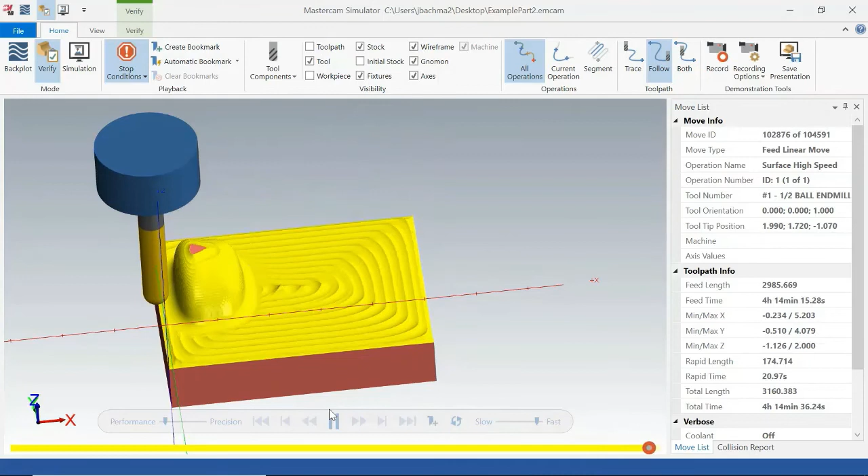All right, and so there's our kind of roughing, and we could even maybe decrease this for our roughing. So maybe we'll get this at 5%. Check that, regenerate it.

Okay, and so now we'll see in our back plot, looking more at 1 hour. All right, so that cut her down pretty good. And then we're going to come and do our finish pass.

So now we're going to select here. It's similar to like this opti-rough, you have this kind of hybrid. This is kind of going to step down around the outside of something. Here it's going to pick a direction. So you kind of have the same, which direction are you mostly holding constant? So we can use the hybrid, which is kind of a mix of them.

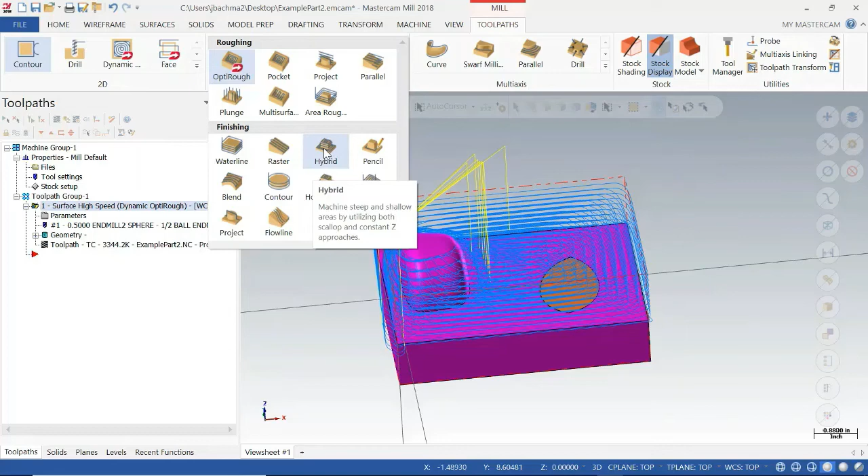And so you'll see it'll look again. If you do happen to get something going down along the sides, we can tell it to avoid that. Again, we'll select this top surface, this face, and this surface. We probably actually wouldn't even need to really finish this one, but we'll just do it to keep it all at the same level.

Tool, use this 1/2 inch ball end mill again. It's pulling in some of the similar parameters from last time. Again, when you're doing this, you'll pay more attention to these exact values. Cut parameters, you can see it's going to go down to about 50 thousandths. And then, so let's go check.

Just calculating it. So yeah, so we have more of this roughing to get most of the material out, and then we can do kind of a nicer finish pass. You can see that's going to take forever, right? So if we do the back plot, so 1 hour 57 minutes.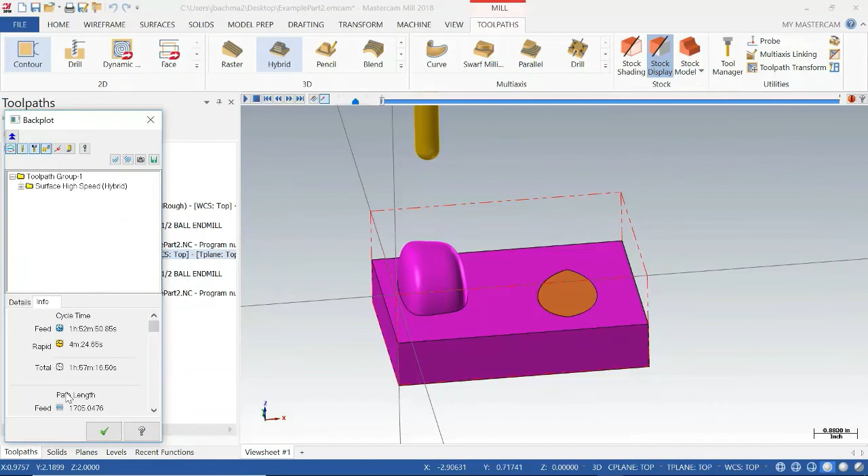So it's going to jump around a lot here with a lot of rapids. So let's select them all and let's verify. Hopefully you're not making a part that's this complex. Hopefully you made a better design than this, but you could see if you've had a curved surface, this would help. And you could try some of the different techniques if you want to see ones that seem to be a little more efficient.

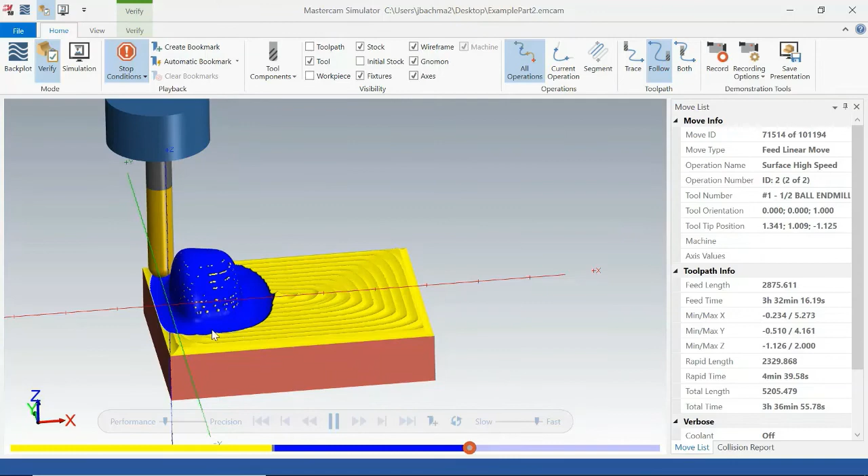So this is coming in, just kind of roughing the part out. All right, so we got a tool change. Now it's kind of coming in. You can see where it's left a little bit of material, right? It's coming in, it's going to smooth off this top surface, right? So that looks pretty decent, right?

Oops, see, error message, right? So it's a good thing we saved not too long ago, because it's probably... good point to remember to save.

So now let's do that case, but let's actually do it so we actually want to mill down inside of here. I don't need the surface anymore, but let's pretend like it's there, because sometimes you might want to mill flat here and then mill under there. So I'll show you how to select that.

So when you go to select it now, I'm going to make sure you have it select so it's translucent, so you can see down in there, and then it's Control, double click, and it'll let you select down inside of there, top surface and this top surface, right? So we can end those selections now.

Inside the cut parameters, right? We can still at 150%. So maybe we want 50%, something like that. And we would turn on the cutting fluid and stuff, right? But just to kind of show this as an example.

So now you'll see it'll come inside and it'll do this part. So let's save it, let's verify it.

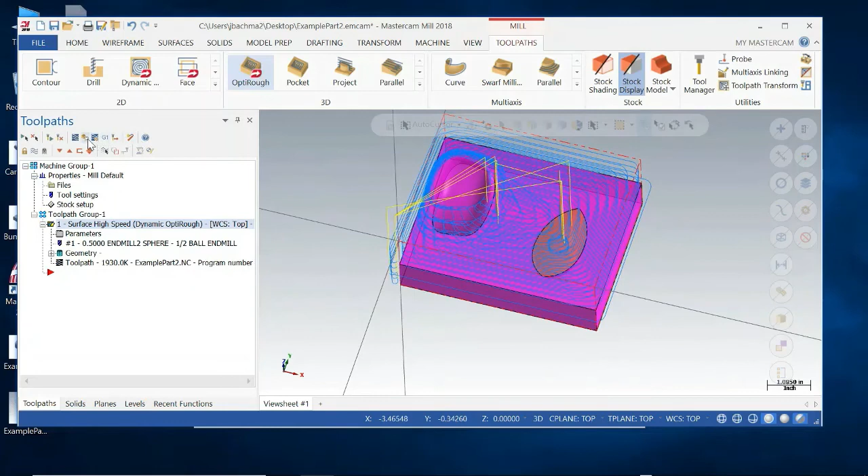So running the program at this point, let's speed it up. Right, so that took us an hour and 23 minutes to kind of rough out this shape.

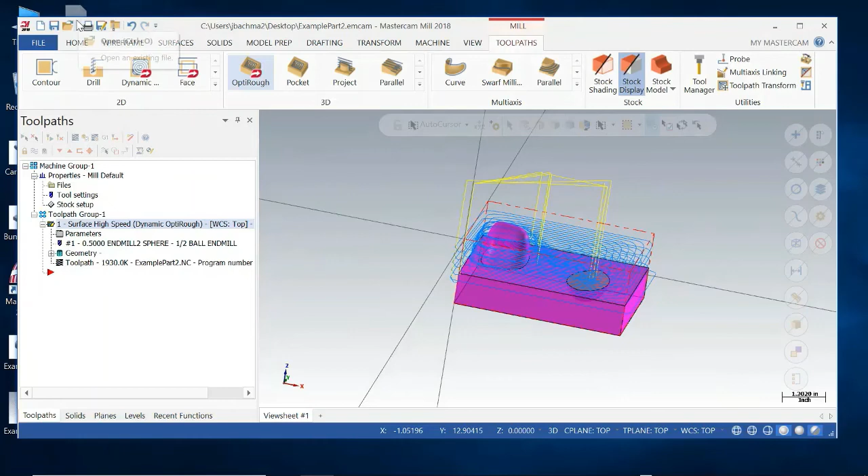At this point, I'm going to go back to our first part. Now that you've seen those, let's look at what we do now to actually generate the G code for the part.

If you're at home, you'll save this and bring it on campus where you have a full license, and then you can run post. This will turn it into an NC file, so it'll have a .nc extension.

We'll click check. It says not all operations have been selected, so you'll want to select them all. It's good that it catches that. So we say yes, we do want to post them all.

So this will be my example part NC. I'll go to my desktop and save that there. And then it's got its little code editor.

Because we don't have the exact default posting that we'd want for Haas, we'll have to make a small modification to the code in here. You'll see that you have your code number.

So you have an O and then 4 zeros for your part number, and then you're going to have your different setups. We're going in inches, G0 is rapid, and we're working in G54 here.

G43 is calling a tool offset, and then it's going to pull in the height of your tool 1. It's going to start at Z.25, so you can see all these movements.

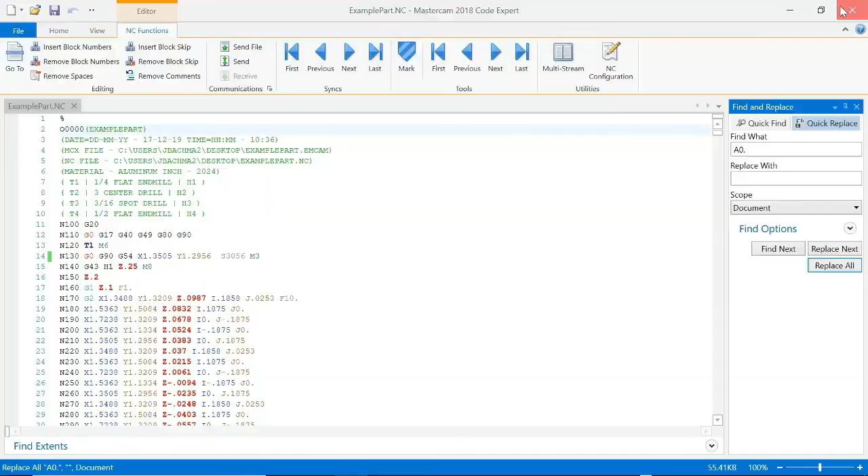All the other things — sometimes I use this, maybe if I want to put some letters on something. I'll use this kind of function, and you can change a lot of the dimensions.

You can click where you want them to go, and then hit check.

If you want to, you can then go to Toolpaths, and you can engrave, or usually I just contour the part. I'll usually do one of these kind of window selection methods on this part, and then the start point maybe is up here. So that's going to select these two. You can see some of them that we don't want.

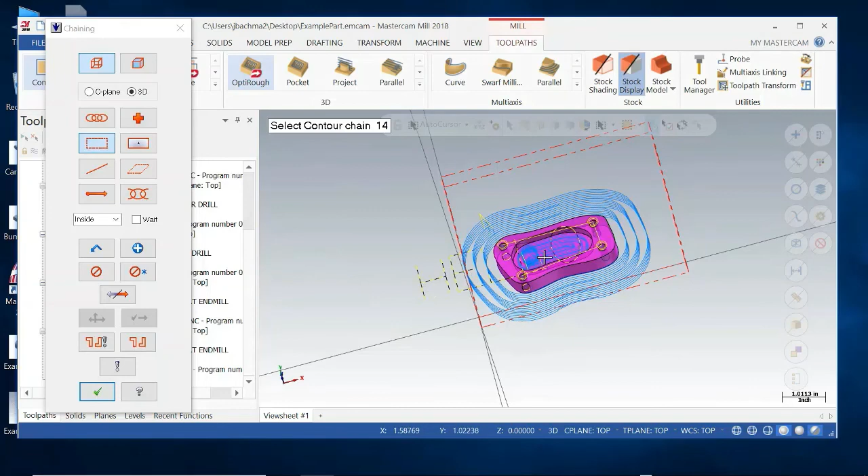So if we want to try and only get the entities we need, one option is to try and get the bounding box to only highlight those entities. That's one easy option to try and select it.

You can also come back in and click things to unselect, but I find it's just better to find a way to select all or delete the entities you don't need, or just come and click through the ones you do.

So you can click through here, and the only thing you'd want to make sure of is this compensation type. Basically, you're just going to want this to be off, so that it's going right down the middle. Otherwise, it's going to be down the sides.

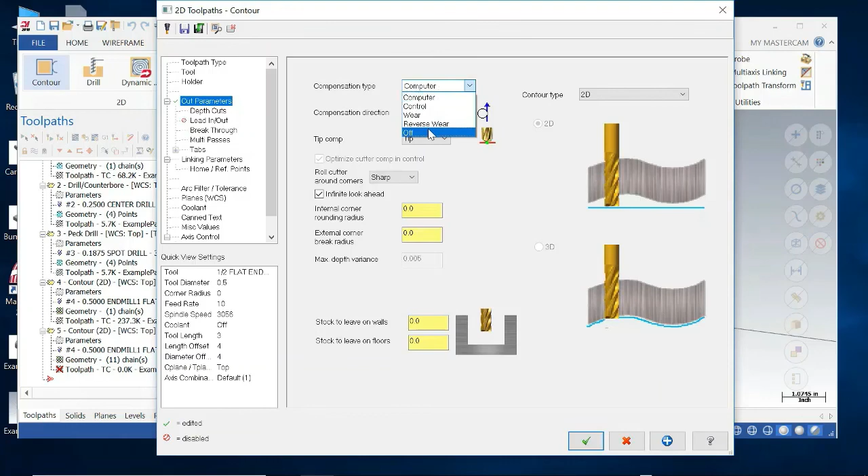So that'd be one other thing — I didn't select anything yet, so that would be one way. You could write some letterings. You'd want to select engraver, select this, and delete it.

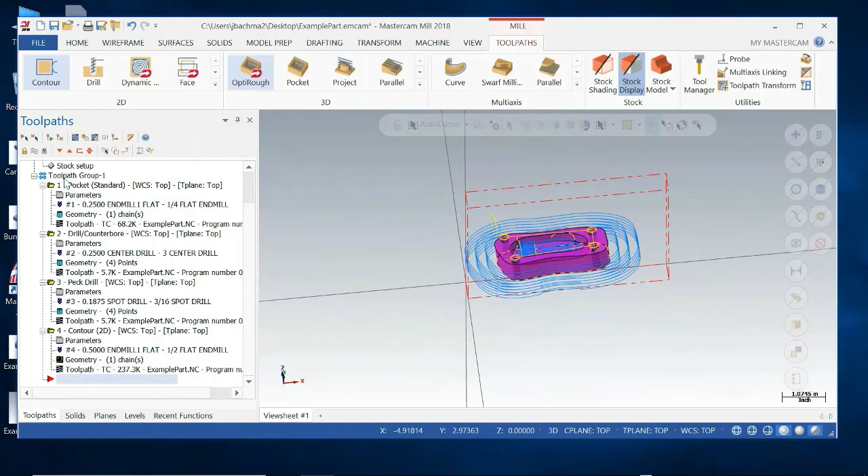One thing that accidentally happens sometimes: I'll have everything selected, right click, and hit delete, then hit yes, and I'll accidentally delete everything I have, which is annoying. Then you try Control Z and it's not bringing back your operations. So that's one reason to save a lot.

Another thing we sometimes use, let's come in here. I'll put in a rectangle. Select first corner position, maybe 1,1, and the second corner maybe 2,2. So we'll do a 1 inch by 1 inch square, and let's say I wanted to mill this toolpath out.

So let's come in here and do a pocket. I'm going to select this wireframe and go along the left, so that looks good. What happens when I first come in with a 1/2 inch flat end mill, and let's go down 0.1, all these up.

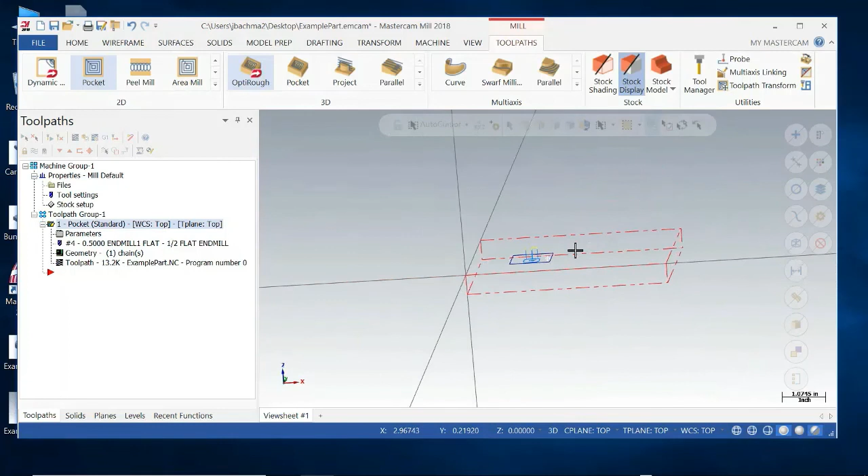This is going to come in and cut this material out. Let's verify that one real quick. Let's hit check, so you see it'll leave these corners, right? So what if I wanted to come in with a 1/4 inch end mill and finish that off a little bit, but I didn't want to remill all the inside?

So what happens, I'll do another pocket. I'll select this chain again, and this time I'm going to choose my 1/4 inch. Check, and you'll see it'll do all these cuts. Let's get rid of this one so we can see it, toggle those cutting toolpaths off. So you see it's cutting all this material on the bottom that we really just want to come and remove these corners a little bit.

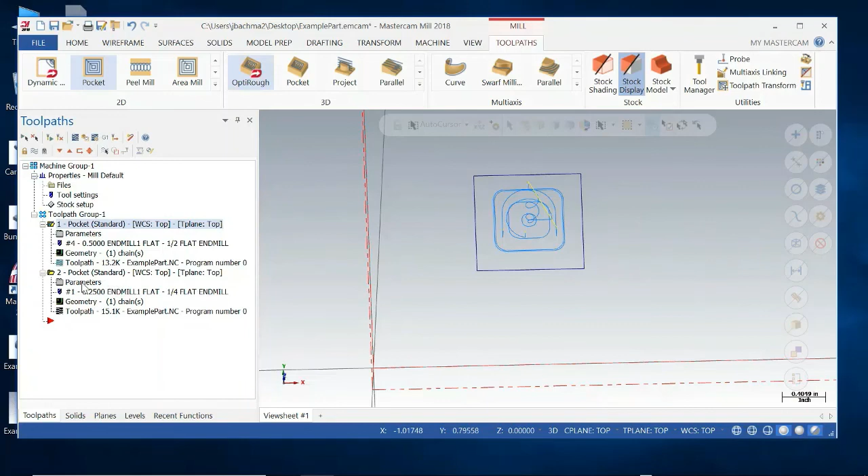So I'm going to come back into parameters, linking parameters, and make sure we're actually doing it to that depth, we'll do -0.1 absolute. What you can do on this cut parameters, pocket type, is select remachining. From the previous operation, we'll select 0 to leave on the walls. Now check, make sure this was 0 on the walls too. Check, so we regenerate all the dirty operations.

Now it's trying to think the remachine, so that looks right. I'll press enter to continue. That's finished tool, that looks good. Remaining stock, that's right. So this looks pretty good at this point. Let's try and verify it.

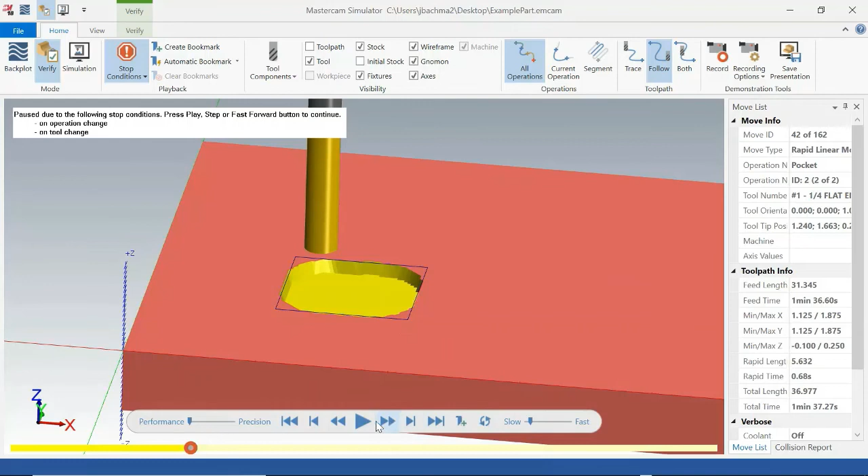Oh, so the ball end mills, that's not a ball. So it comes in then, and there it does that part. We'll slow it down a bit so we can see this last part. This one's going to come in, it's just going to peck away at these corners basically. That way it doesn't have to try and machine the whole bottom, just the parts that are left.

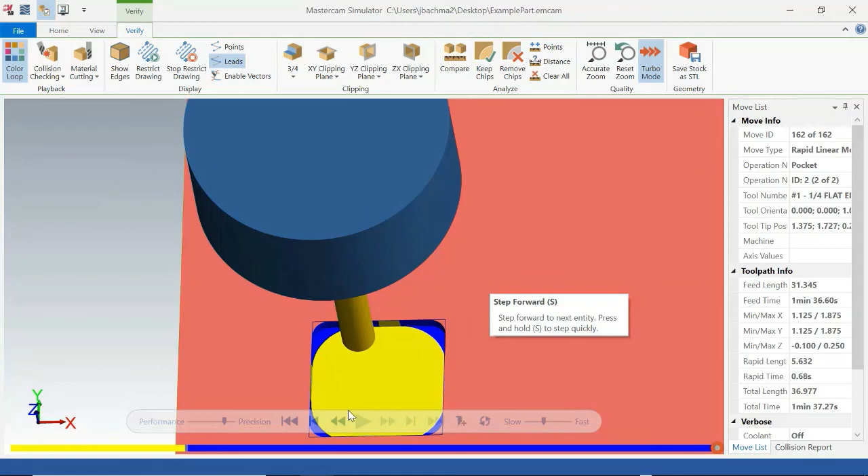Do it fast. Remember, another thing we want to do is I like to have the color loop on, and then I can see what comes to this, and what's going to get cut away with the blue, right? That helped me get a little bit more of a sharper radius in the corner. Right click and hit fit, get this here.

So yeah, that's a little bit about the different things you can do in Mastercam to program. After watching this, hopefully you'll be ready for an in-class workshop where we can begin to actually work on some of this stuff and you can begin to play around with the tool.

But yeah, I would definitely encourage you to talk with a lot of the machinists on campus, or students who use the tools more than you do, to learn more, because this is just a really quick run through that will hopefully get you started thinking about some of the different things you can do. All right, well, good luck and be careful.